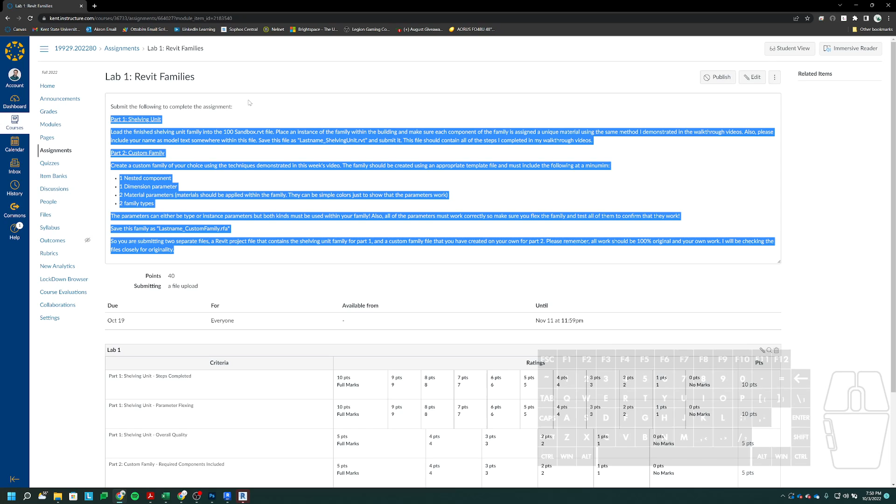So when you get to an assignment drop page, I usually have very specific instructions typed out to make it as clear as possible. You'll want to go here before completing the assignment so you know what all you need to build. This is just going to be all the required stuff, and it should be pretty easy to understand, hopefully.

Below that is your grading criteria, so this is the rubric. You'll know exactly what you're going to be graded on and what you need to focus on.

For example, for this first assignment, the total assignment is worth 40 points. A quarter of those points is just, did you complete all the steps? After that, did you put in all the correct parameters and did they flex properly?

Then we have overall quality. How nice does it look? Did you do a good job? Pretty straightforward. So I give you the rubric so you kind of understand what exactly I'm going to be assessing you on.

But as long as you do what I say in the videos and you read these instructions and do what they say, you should have no reason to worry about getting anything other than an A on all the assignments. And the way I approach my lectures and assignments is I usually like to walk you through them to help you understand.

So I really want to guide you and not just throw you to the wolves and have you try to figure everything out on your own, because I know how complicated these programs are and how overwhelming it can be. That's why I set it up like this.

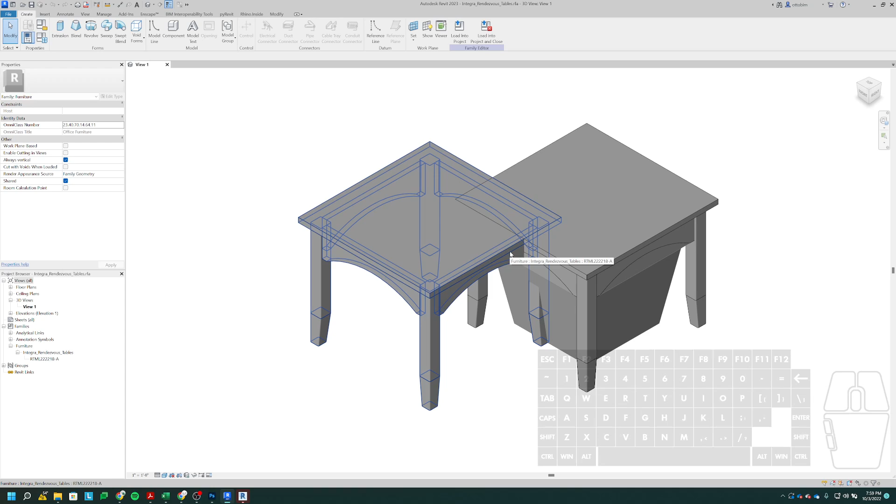So this family that I'm opening here is a family that a client gave me, and it's supposed to be a single table. This is something that's on their website, and a big part of what I do is have a...

...client ask me to audit or go through their current library of Revit models and assess them for quality, and tell them what's wrong with it, what needs to be done, what needs to be fixed. So this is one that I got that just kind of made me laugh because it's so weirdly bad.

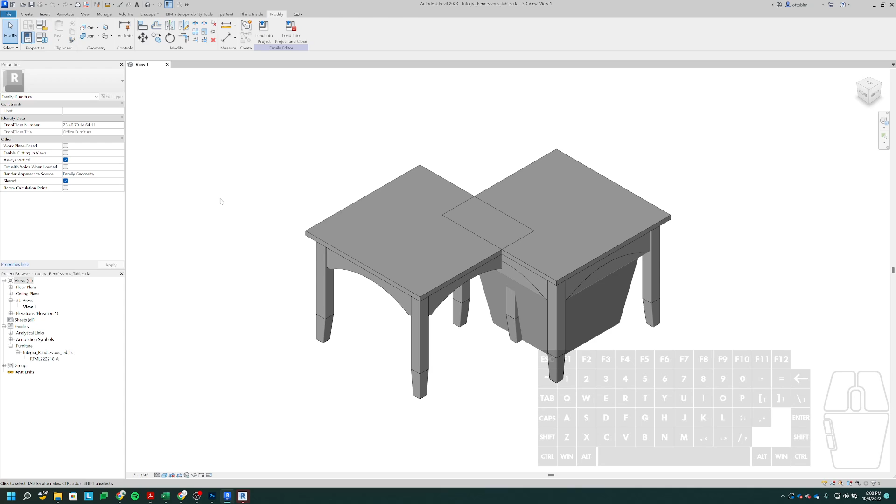So really it's supposed to just be this one family here, and by itself that family would be fine. For some reason, when you load the family and open it, this is what you get - you get 2 copies of that family on top of each other, plus this third base, I guess. It's just bad, the whole way they set this up. Obviously you don't want a table to look like this when you load it into your project. And if it does, and you want to be able to use this table, you need to know how to go into the family file to fix it to make it work for what you need. So we're going to get started just with the basics.

So first of all, over on the left side in Revit, we have two different sections: the Models section and the Family section. Models is for your Revit project files, whatever you're doing your studio project in—that's where you're going to create that. Families is going to be over here.

So the first thing we want to do if we're making a new family is click on the New button. Something to note here, and I bring this up in those Revit review videos—very important—I've heard from Jakisha that some of you have this problem and it needs to be fixed. If you click on that button and it opens this window, some of you probably do not have all these files.

Same goes for creating a new model. If I go up here to New Model and choose a template file for my Revit project, some of you may not have anything in this list, and that's a bad thing. If you don't have anything in this list or this folder, make sure you watch the video where I discuss that and show you how to fix it. And if you still have problems, tell me, because that has to be fixed—you're going to run into a lot of problems if you don't.

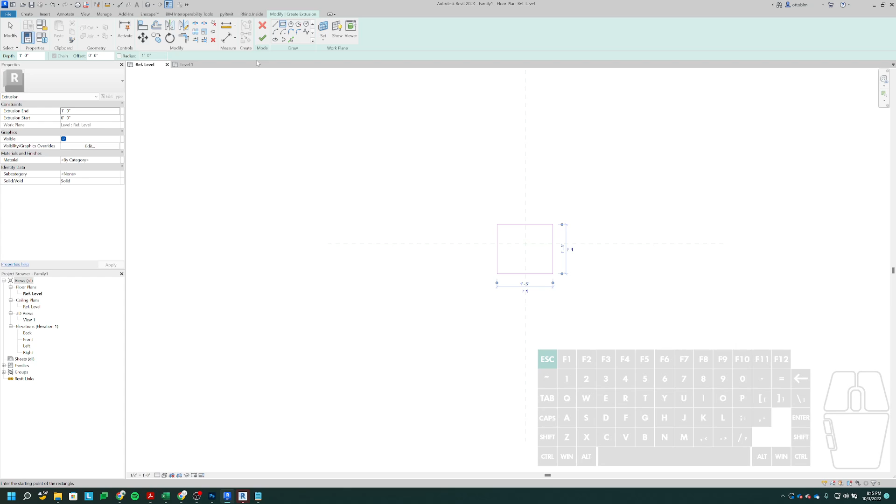All of these tools are what are known as solid tools. So let's just do an extrusion. If I were to make an extrusion here, that's going to appear just as a basic box, a solid box. Void is the absence of a solid, so a void will cut things away.

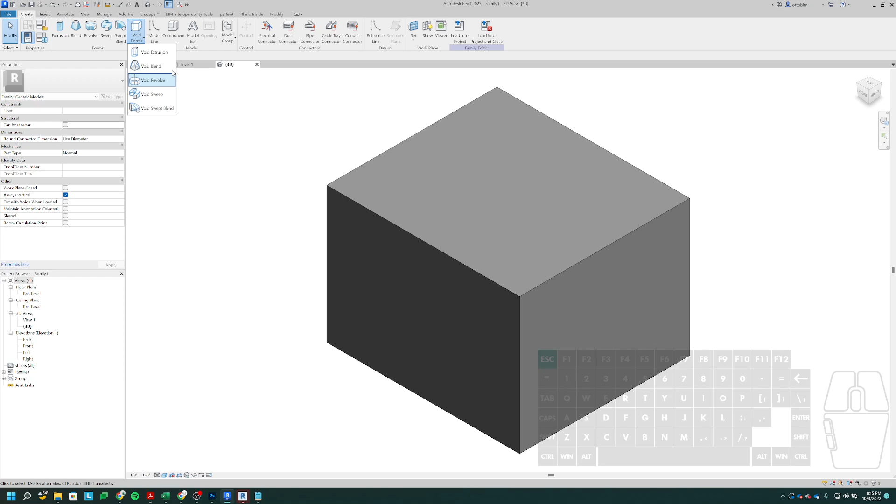So if I were to create a void extrusion, what I could do is click on void extrusion, and then again, I'm going to draw another shape over top of my old shape. At the point where those two intersect, it's going to cut a hole.

So you can make that anything you want and it'll update and cut away from the solid. So that's the first basic concept: void versus solid.

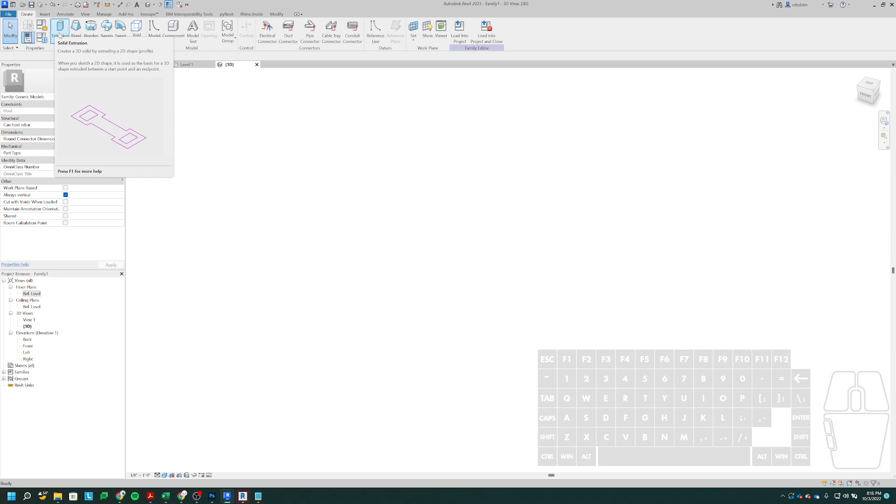Now that we understand that, let's get into what these actual tools do. If you're familiar with Rhino, you'll see a lot of overlap in the concepts between the two in terms of how you build geometry, like extrusion, what I just did. A really cool thing about Revit too, if you don't understand something, just hover your mouse over the tool and let it sit there, and you'll get a little video that pops up explaining what that tool does and how it's used. So if you get confused, just hover your mouse over it and it'll give you an idea.

As this says, all we're doing is drawing a profile. If I click on that, we're in sketch mode. Hopefully you're familiar with sketch mode—that's when the ribbon turns green and you get your drawing tools. We want to be working in a 2D view, like our floor plan here. Reference level, that's going to be our top-down floor plan view. So when you're in sketch mode, you get your tools here.

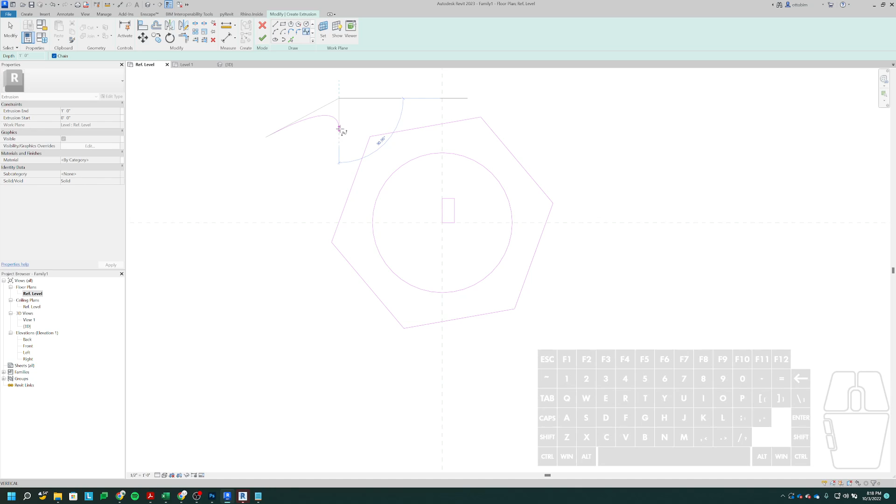For instance, we have circle, rectangle, polygon—we can choose how many sides we want. You'll get options here where you can do different things with the specific tool you're on, so when I change this, it changes the options available to me. Okay, arcs, splines, all kinds of drawing tools. Basically though, all we're doing is drawing a custom shape that we want.

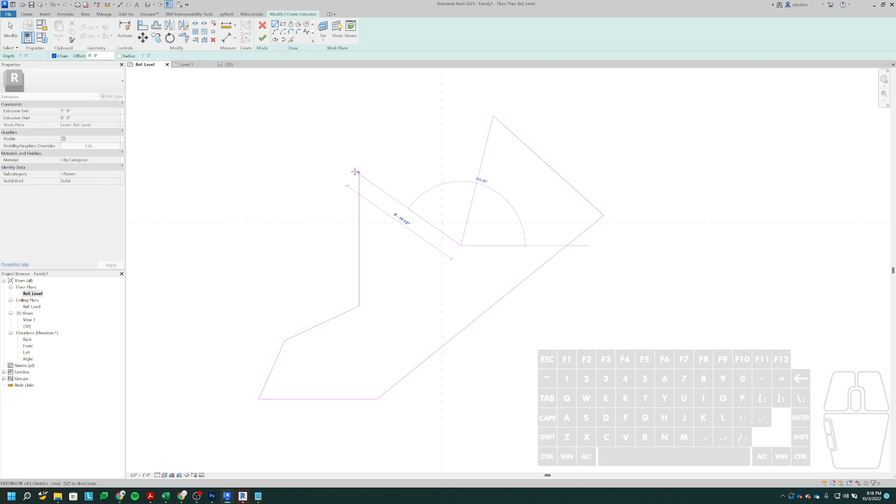Let me just make something a little abstract. I'll just use lines and draw some random shape. That's my profile, just that shape I drew in pink lines. Now that I'm done with that, I hit the green check mark, which takes me out of the drawing mode or edit mode.

If I go to a 3D view, default 3D view, it's going to show me what that looks like. An extrusion is really good for basic shapes that are only 3-dimensional in one direction—we're just taking that profile and pulling it straight upward, kind of lofting in between the two. If you're familiar with Rhino, you'll understand the loft command: you have two profiles and you bridge the two of them to fill the space in between. That's all an extrusion is.

The next one is a blend. A blend is a slightly more complicated extrusion—this is where you take two different profiles and make the in-between. Revit tries its best to make what's in between the two. Going back to the loft command in Rhino, you could draw two totally different weird shapes and use the loft tool, and it creates a weird morph between the two profiles. Same thing here—so if I were to, let's say, draw a hexagon.

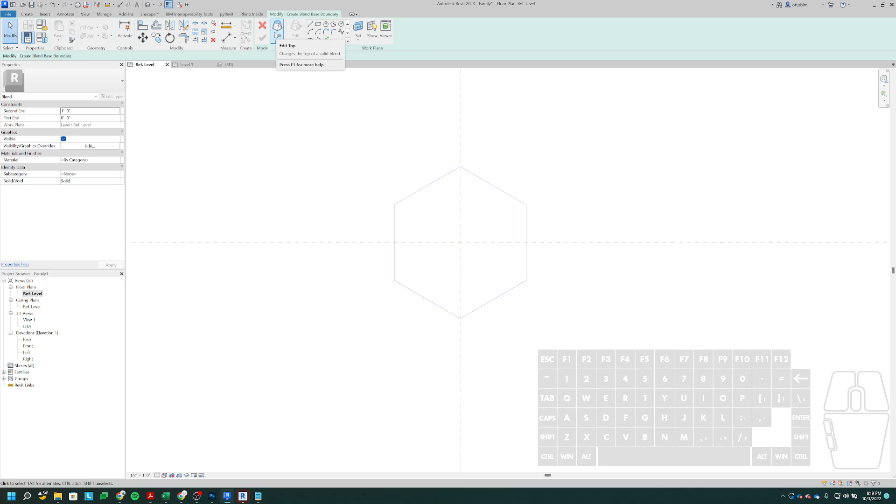Now let's just draw a hexagon there. Once I do that, I have to go to where it says edit top—so I just drew the bottom profile, which you can see here. The bottom profile is the bottom part of that plus sign, okay? So now the top profile is going to be the top part of it. I hit edit top, and then I can draw another hexagon, but maybe this time I'll rotate it—let's go 30 degrees—and now we click Finish Edit Mode.

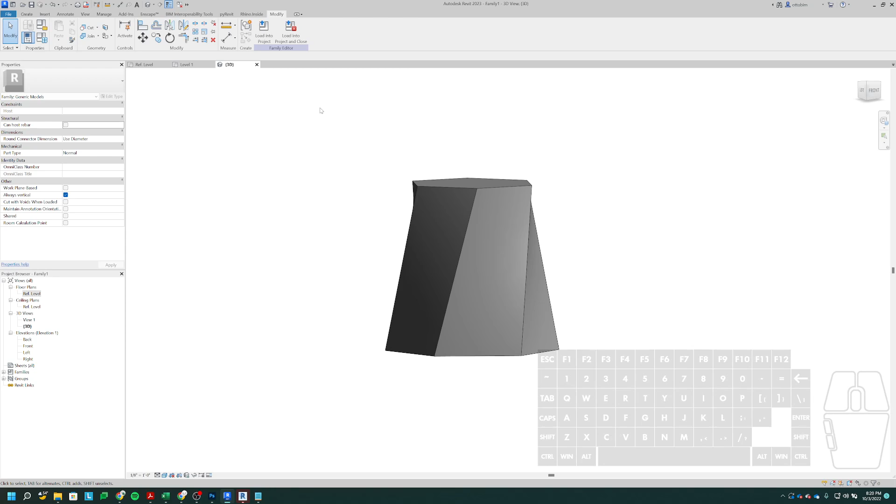Now you get a little preview here in the top view of what's happening—it's twisting. If I go back to my 3D view, you can see I have a smaller hexagon on top, and it's blending between the two, making a twisting shape. That's what blends are really good for—anything smaller on one side than the other but with 3D depth, or any weird shape where you want a cool morph between. So that's a blend.

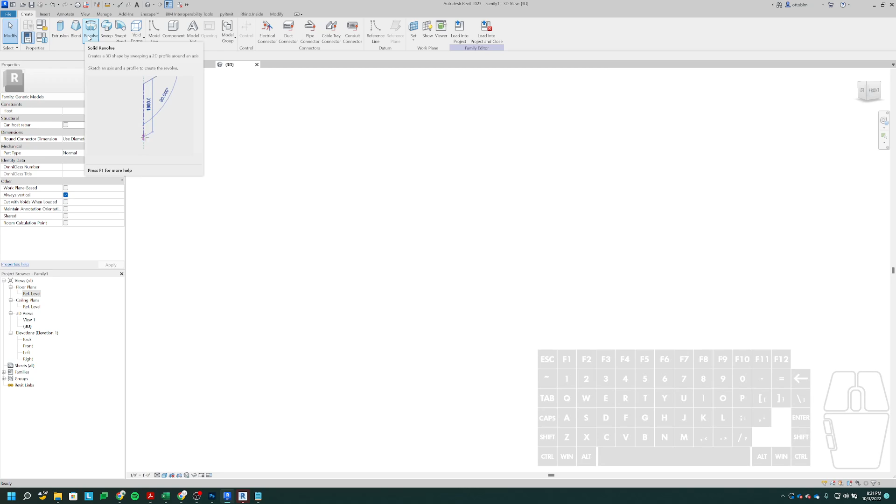Next one is a revolve. What a revolve does is you get a central axis, and you draw basically a cross section of a 3D shape. A really good demonstration for this is, let's just say I want to make a wine glass.

So if I want to make a wine glass, I'd want to make sure I'm in an elevation view. So I'm going to go to my front elevation, and I want to make sure that I start my wine glass here at the origin. The origin is going to be right here where it says reference level. Basically your reference level is your ground plane. So if I were to put this into my Revit file and I drew this at the ground plane, it's going to sit it flat on the ground.

This vertical line is this line, this one running top to bottom. It's the same line, but it's in 3D. So if I'm back in my front elevation, that's just that line vertically, basically. So I want to be right at the middle of those.

Now the first thing I need to do is establish my axis line. The axis line is going to be the central pivot that your shape or profile is going to spin around. Okay, so I'm going to draw an axis line.

I'm going to set my work plane. I'll get into that in a minute on what I'm doing here, don't want to skip over that. Set my work plane. So now I'm drawing in my front view.

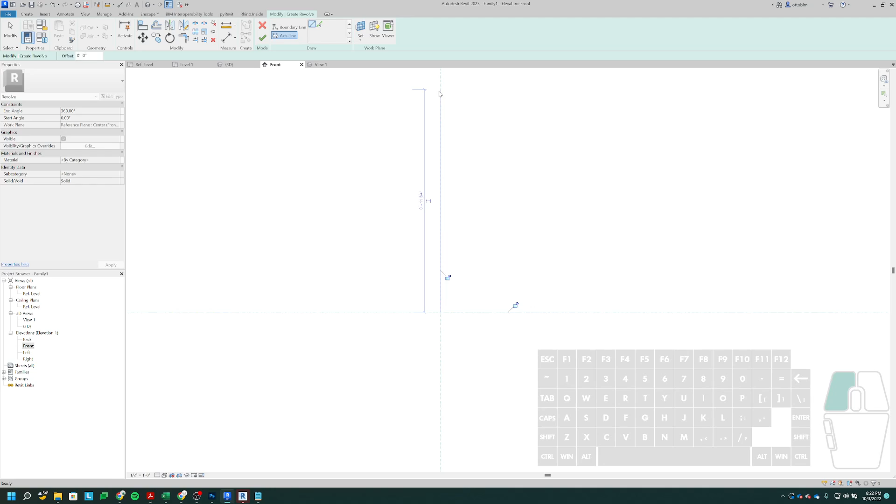So click on axis, and my axis line is just going to be here on my middle plane going vertical. And this line doesn't matter, it can be any length. It truly doesn't matter, but you have to make sure it's going in the direction that you want the shape to spin around. That's all it's there for.

If I were to put it like this, that's going to spin it at an angle, which I don't want. I want to make sure it's going perfectly vertical.

So then the next thing is drawing your profile. This is where you use boundary lines. So if you look at that little example there, the pink is my profile, so that's why I'm going to be using this tool to draw. The blue is my axis line. And you can kind of see the 3D shape there, what's happening.

So we're going to be drawing the pink cross section, and we're going to be spinning it 360 degrees around that blue dashed line, and it's going to make that thimble shape, or spool shape, that you're seeing there.

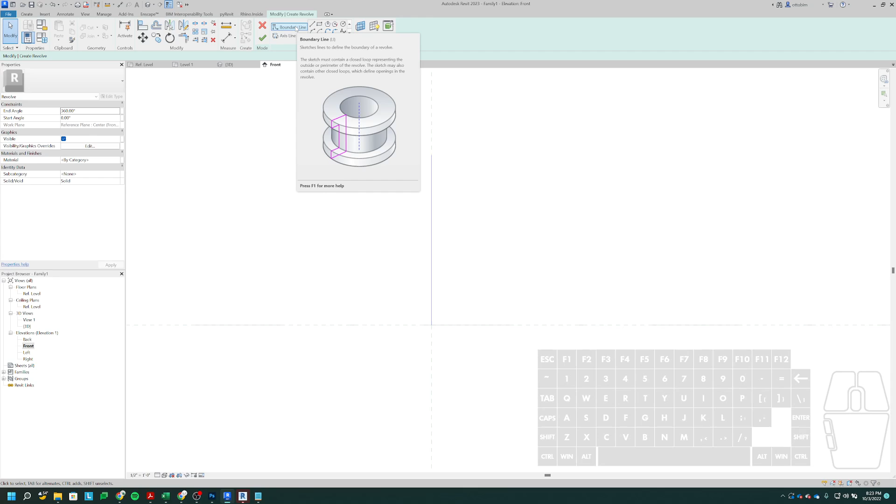So if I were to do this as a wine glass, first I'm going to start at the bottom, and I'm drawing half of the wine glass. So I'm going to draw the flat base there. And then I'm going to go here and establish kind of where the stem is. So I'm just going to draw a little vertical piece right there. Okay, so let's say that's my stem.

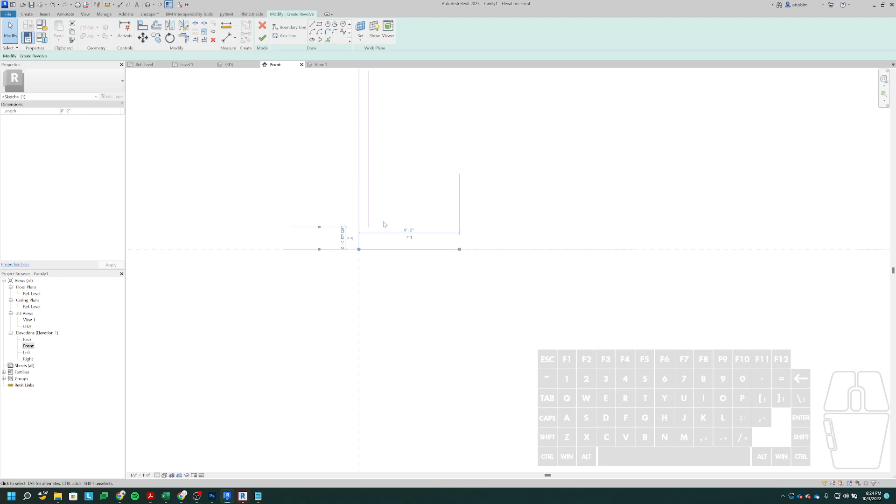Now I need to connect my stem to my base. And if you think about a wine glass, it's got a bit of curvature and kind of a taper to where it meets up with the base. So for that, I could use a spline.

Using my spline tool, I'm just going to draw a little shape here. And I want to make sure that the end of it—you click a few times to get these points—I want to make sure that my end point here ends right there at my base, at the end of it. After I draw my spline, I can then go and grab these points and edit them.

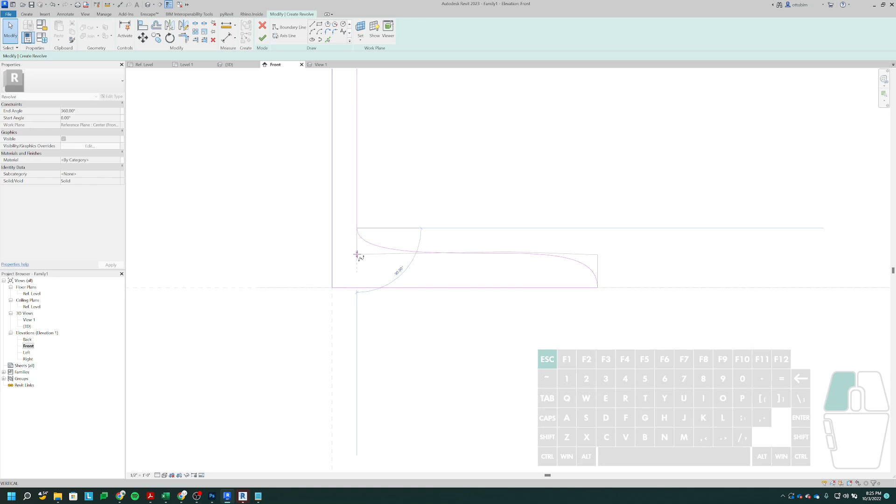So maybe I want this to be vertical here at the end. And then where it meets up with this side, you want this to line up straight with the vertical part. So you see how that gray line is perfectly straight with the pink line? That's what you want for it to look correct.

And then the middle point, you can kind of do whatever you want with it. Okay, so there's my base. Then for the top part, you could do that in a few different ways. So maybe the best way to do that is establish how tall this is. So proportionally, maybe somewhere like here at 3.5 inches. And I'm not using realistic dimensions at all, just don't worry about that.

But now I could use something like an ellipse. What an ellipse does, it's basically like an oval.

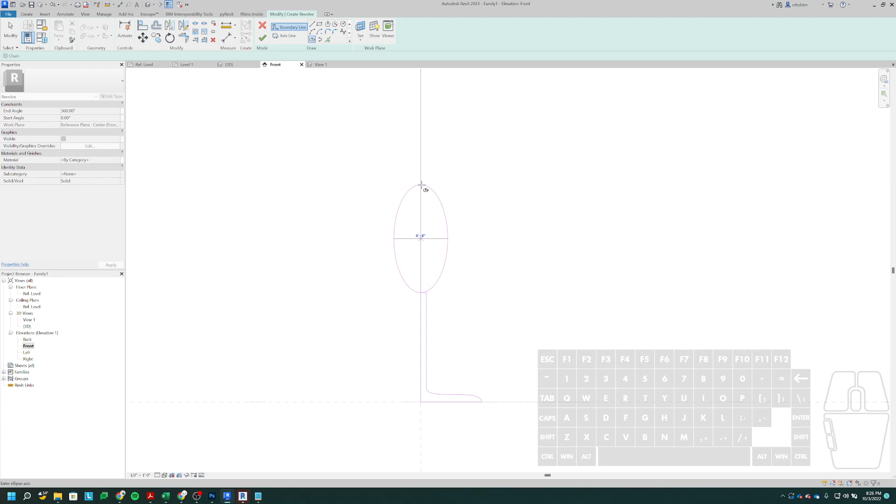With this, I can start at the midpoint of this line, then go to this endpoint that I established, and drag out to the right to get how wide this is. Maybe I want it to go somewhere even with my base here, that would be fine.

Now that I have that in there, I want to chop this off and have a flat top here where I would actually drink out of the wine glass. So I'm just going to draw a line cutting through this, and you can move it up and down with the nudge tools after the fact to fine tune it. Maybe something in there is good.

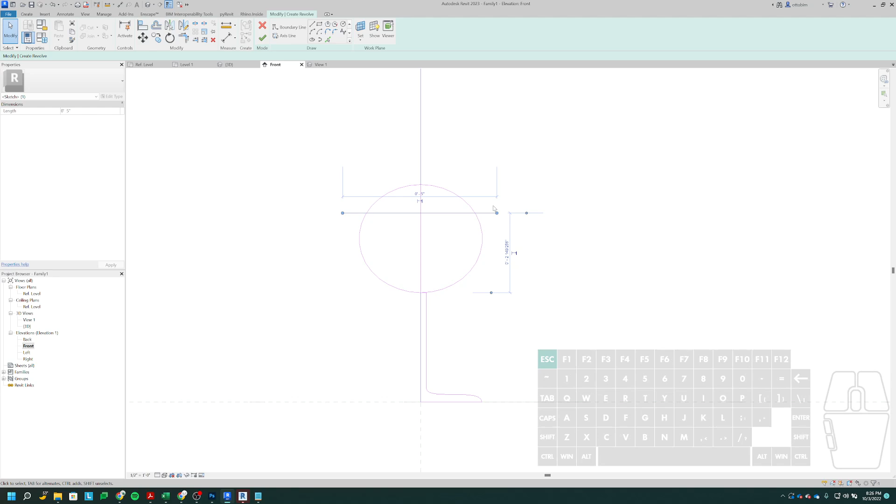Now we have to clean all of this line work up so it actually is a correct profile, because right now if I hit OK, it's going to give me an error. I can't have any overlapping lines. This has to be a nice, cleanly drawn profile in order for it to work correctly. So to do that, you have to get familiar with these modify tools.

The modify tools are the exact same in a Revit project environment as they are in the Revit family, so it's going to look very consistent going from the Revit project file over here to the family editor.

What I want to do is use the split tool. The split tool lets you hover over an element and kind of chop it in half with an X-Acto knife so you can edit it. If I click on split element, I'm going to cut my ellipse in a couple different spots, here and somewhere down here. Now that I've done that, hit escape a couple times, I have two separate pieces, and I can delete this one away.

Next thing I need to do is zoom in here where I made this little line going back to the center, and I need to get rid of it. So I'm going to delete that.

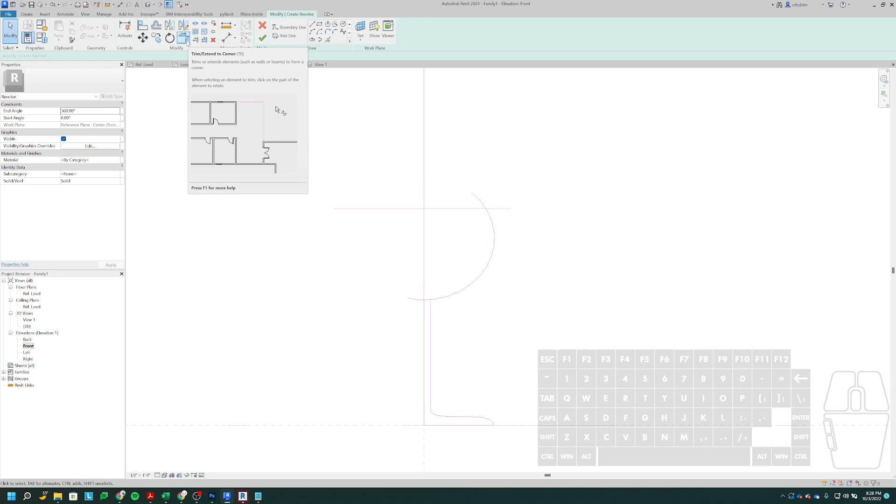Then we should have everything we need to finish this profile. To finish it, you can clean it up with this tool, and I use this tool all the time, so make sure you know how to use it. This is the Trim Extend to Corner tool. If we click it, it lets you click on two lines and automatically trim this up and make it a nice joint.

When you use this tool, you basically want to click on the side of the line that you want to keep. In this case, I want to keep this part of the line, and I want to keep this part of the line, and then the other two extensions go away. To reiterate, if I were to click on this side of the line and this side of the line, it's going to get rid of the wrong thing. So you have to make sure you're clicking on the right part of the line to get it to do what you want.

Again, I'm just going to do this and this, and then we're going to do this to the vertical pink line here, and this line here to this vertical line. Sometimes you get these little errors, that's fine in this case. That just means it's taking this line and disconnecting it from this pink line, which is fine, so you just hit unjoin elements.

Then we have to finish this off by connecting this line down to our base. Okay, so there's the finished profile.

If I were to hover over one of these lines and hit my tab key, if everything turns blue, you know that it's good, you're pretty much good to go. If it doesn't, you probably have a little mistake somewhere that you need to correct, and then you can go in and fix it. But hovering over it and hitting tab, that's a really good test to see if something is wrong.

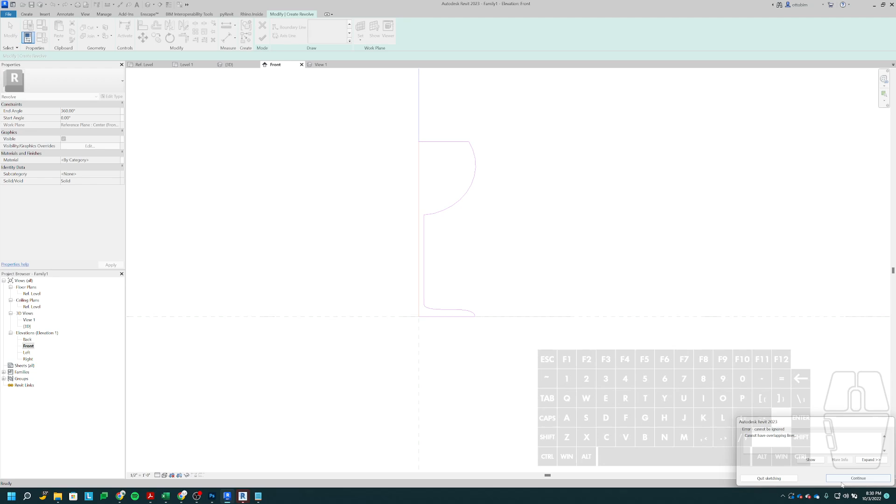So what I like to do is do the test where I tab and make sure everything is blue. Then I click on this and use this tool right here, which is cut to clipboard. You can click on this button, or use Control C, or hit Control X, and that will cut the profile onto your clipboard and get rid of it here.

Now I can see that pink line that's overlapping, and I can highlight it and get rid of it. Then to bring back my profile, I go here to Paste, and choose Aligned to Same Place, and that's going to put it right back where it was, and I should have no errors.

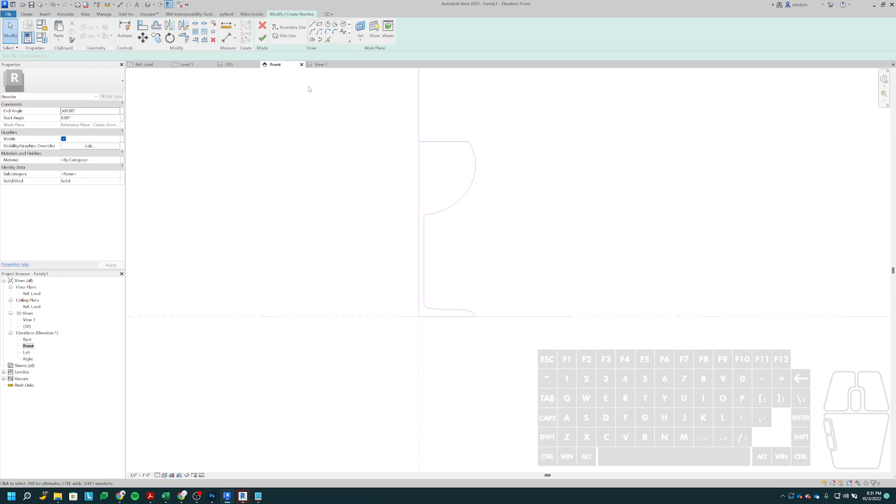Then when I hit the check mark, it's going to finish my revolve. And if I go to 3D view, you're going to see I have a little wine glass that has a filled top to it. So that's one more thing I forgot to show you. Let me fix that.

If you want to modify an element after it's created, go ahead and click on it and then hit the edit button right here. So edit revolve. Now we have to draw in that void part where the wine glass is actually hollow on the inside, because right now it has a flat top, which we don't want.

So to do that, there are a few different ways we could do it, but I'm going to do it this way to show you the offset tool. What the offset tool does, if you've never used it before in Rhino, is it lets you take a line and either move it inward and make a copy of it inward or outward based on a set dimension that you specify.

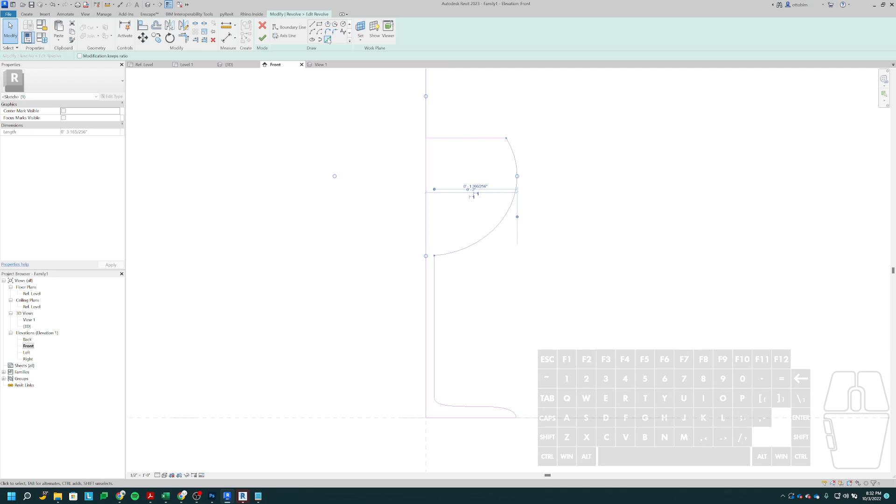In this case, you click on the line you want to offset, and basically what I want to do is copy this line here inward to make sort of like an inner wall to the wine glass. I'm going to use this tool here, the Pick Lines tool. What the Pick Lines tool does is it lets you hover over a line and redraw it. Oh wait, no, actually I don't want to use Pick Lines. What am I thinking? I want to use the offset tool here.

So what the offset tool does, like I said, lets you make a copy. My distance that I want to offset this, I want it to be the same thickness here as it is here on my stem, so like half of my stem width.

So to get that dimension, I'm going to measure between these points, and you can see it's really weird, it says 47 over 256. So it's also showing it up here. You can actually go up here, which is kind of cool, highlight that and right click and copy it, so you don't have to remember that.

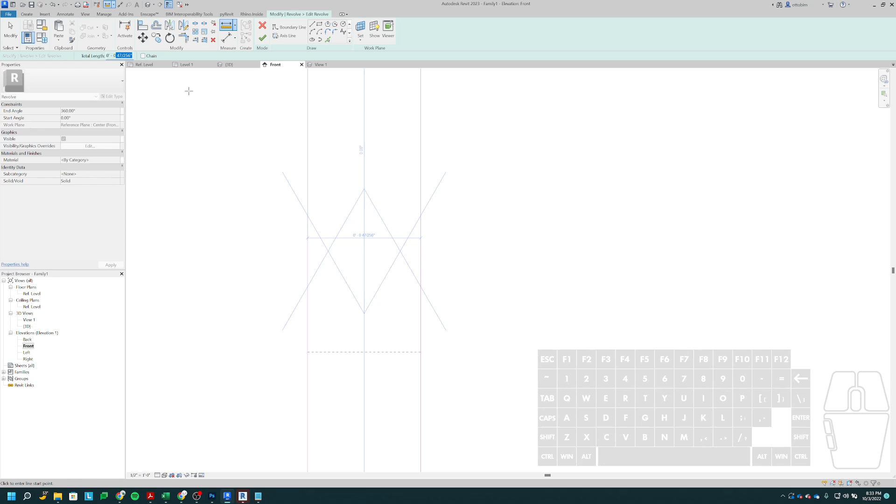Okay, so now that I have that, go back here and use my offset tool. We're going to type, or we're going to hit Control V to paste that in. So now that's set. And then I want to hover over my edge line here.

If you hover over it, this is kind of a sensitive tool to where if you hover over it a certain way, it's going to give you a preview of it offsetting outward. If you hover over it the other way, it's going to offset it inward. Notice we also get this option here to copy it, and we want to keep that checked on because I want to make a duplicate of this line and not delete the original one. So I'm going to keep that on and click once, and it's going to make that copy for me inward.

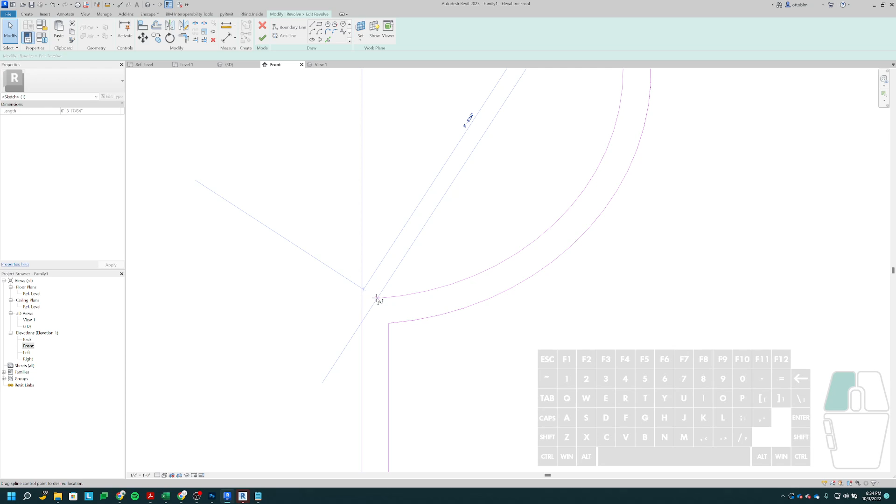All right. Then what I'm going to do is use my trim connect to corner, and I'm going to do this line to, of course it's not going to let me. I'm just going to click on this and use my grip.

Sometimes with offsetting arcs it gets a little weird, so I'm just going to move my grip inward to finish that off. Then up here I'll drag it up so we get some thickness. Usually you won't have to do that, it'll just work, but in this case I'll manually connect the two together.

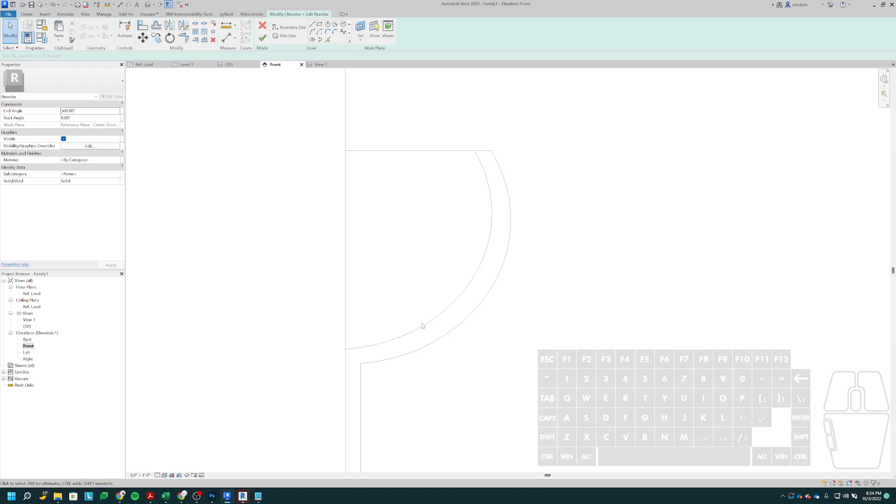So there we have an inner wall. To finish these off at the top, we could just make it a flat edge, but what I like to do is actually round this off a little bit.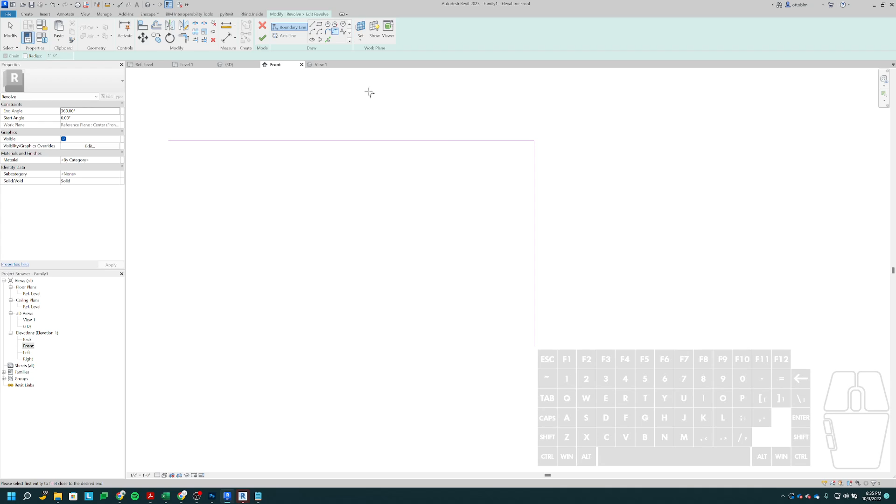There's a tool called the fillet arc tool, which is cool. What it does is let you click on two points to create a rounded joint instead of a hard edge. A good example would be a corner like this - click fillet arc, click the two points, and make a nice rounded joint between them. But in this case it's not going to let me, so we'll just leave it like that.

So then we'll click OK, go back here, and you can see now I have a nice open area inside my wine glass, and it looks more real. Okay, so that's the revolve tool - drawing a profile and spinning it around a central axis.

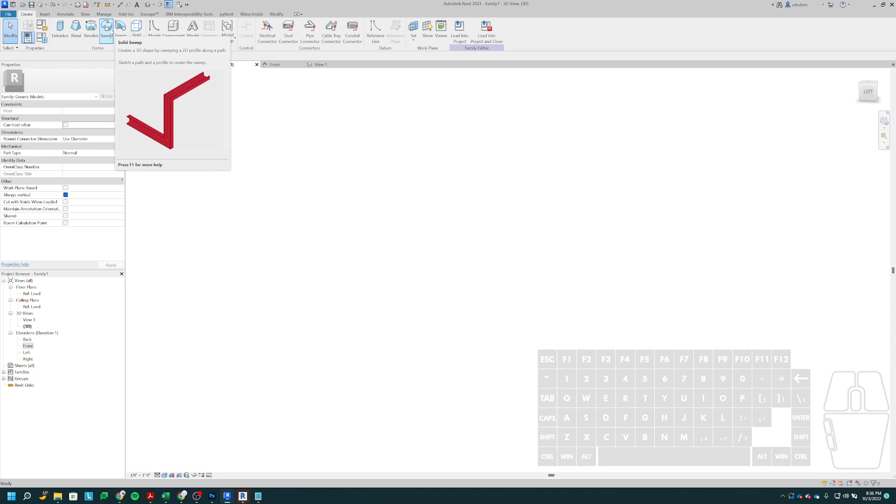Third tool is going to be sweep. What a sweep does is it basically takes a profile - let me go back to the tooltip to show you the animation - it takes a profile and extrudes it along a path. In this video you can see they're drawing the path, then they draw the profile, and when it extrudes, it's like a snake that makes the profile follow that path.

Good use cases for this in a project environment or real life: if you think of crown molding or a baseboard, how it wraps around the edge of a room, you would use the sweep tool to replicate things like that in Revit. I use it a lot for furniture, like legs of furniture - a lot of the furniture I build is industrial stuff with metal pipe legs, and I often have to use sweeps to build that geometry.

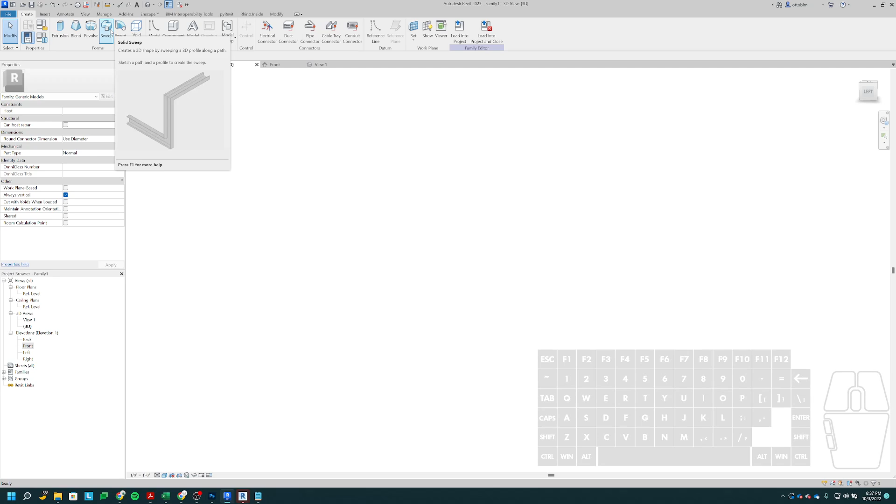So let's click on that really quick. Basically, if I'm in a front view - no, I'm in the 3D view. If I'm in a front view, set my plane. I'll show you what I do on a daily basis when making those metal tube legs. So let's say I have one leg here.

I want to first click on sketch path to define the path. So I want to start by drawing that, and then draw it over here, and then over here.

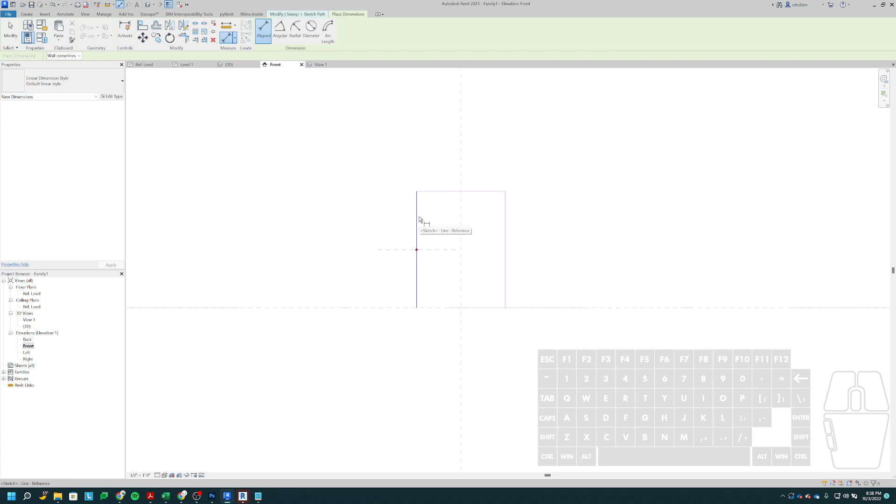Now I want these legs to be equally spaced from the center point of my origin. To do that quickly, I'll use my dimensions. If I dimension from the left to the middle to the right, I can see those are matching, but to keep them matching I want to hit this button called equality. I'll get more into equality and constraints in a minute, but constraints let you create relationships between geometry.

For example, if I click on this line and move it in or out, you can see how the left one moves in or out with it, relative to the center point of the model. That's kind of cool, so I'm going to link those together like that.

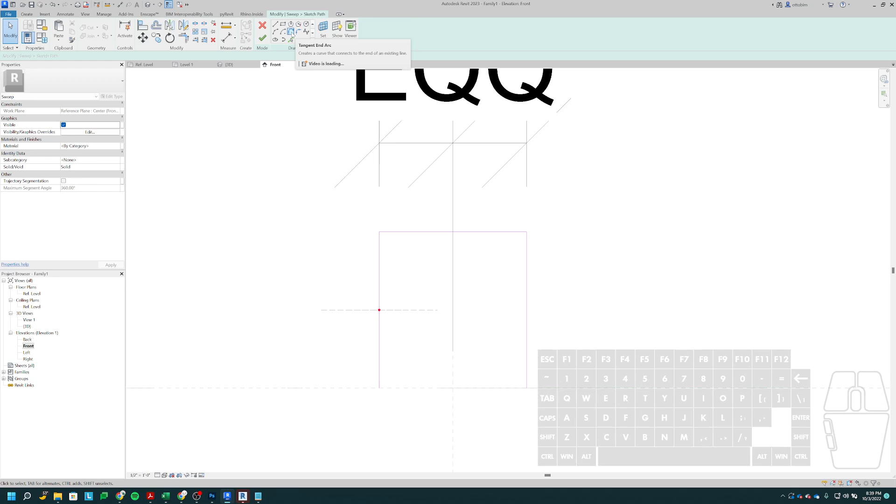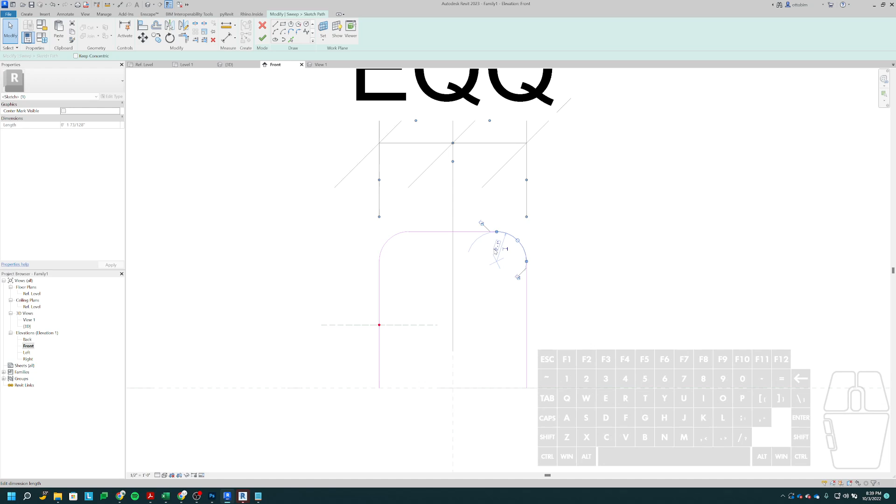Then I'm going to use the fillet arc tool like I showed you before, and draw a little arc between these on both sides. I want to make these the same arc radius, so I'll click on one side and edit this. Right now it's set to 3/4 of an inch, so let's do 1 inch. I'll click on the other one's dimension and type in 1 inch. Enter. Now they're the same.

So there's my path that I want my legs to go along. Now I'll hit the green check and say okay, path is good, done with that. Next part of this is the actual profile that gets swept along the path.

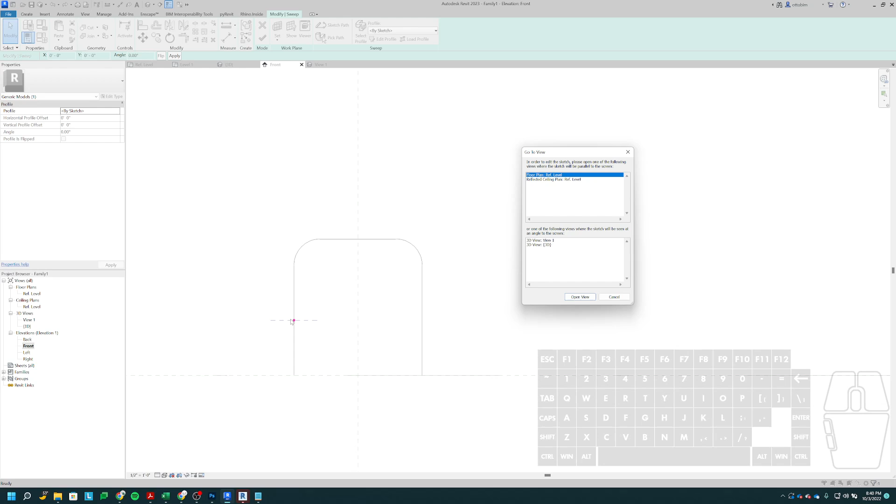To do the profile, you click on Edit Profile right here. When you click on that, it takes you to another view to draw it, because this is the point where you're drawing the profile, this little plane here. If you think about this in 3D space, the profile is basically perpendicular to your current view. I'll show you that in 3D, because that's hard to wrap your mind around if you're not familiar with working in 3D.

So I'm in a 3D view right now, which hopefully illustrates the point better. I have my path here, and if you look at the actual point where I'm going to be drawing my profile, it's perpendicular to that path. If I were in a front view and tried to draw it, it's not going to work. I need to be in a top-down view or a 3D view with an angle where I can see what I'm doing.

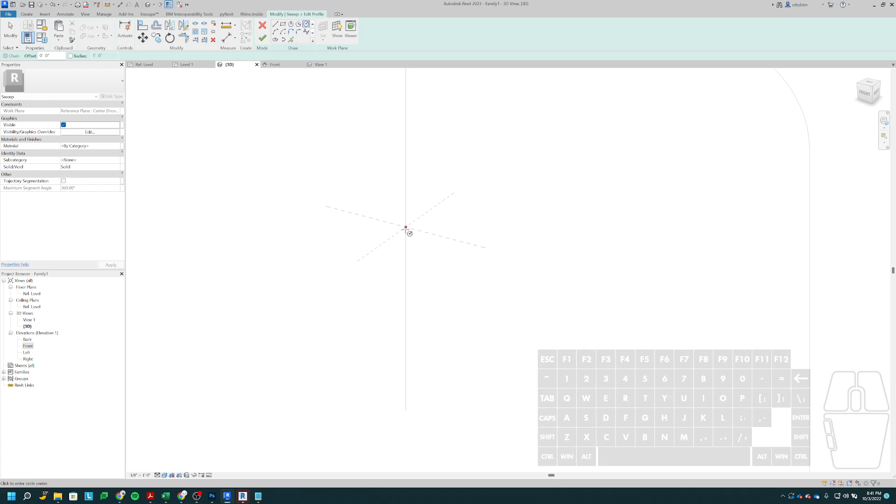Now I want to draw my profile, so I'll hit Select Profile, Edit Profile, and get into the Edit Profile settings, you can see that right here. I want to make this like a tube, so I'll use a circle as my profile. I'll click on the circle, click on the center point of my plane, and click on Show Plane so you can see it. This is the 3D plane that I'm drawing on, this blue square. As I draw, you can see it's stuck to that 3D plane. I'll draw that circle and exit out, hitting escape a few times.

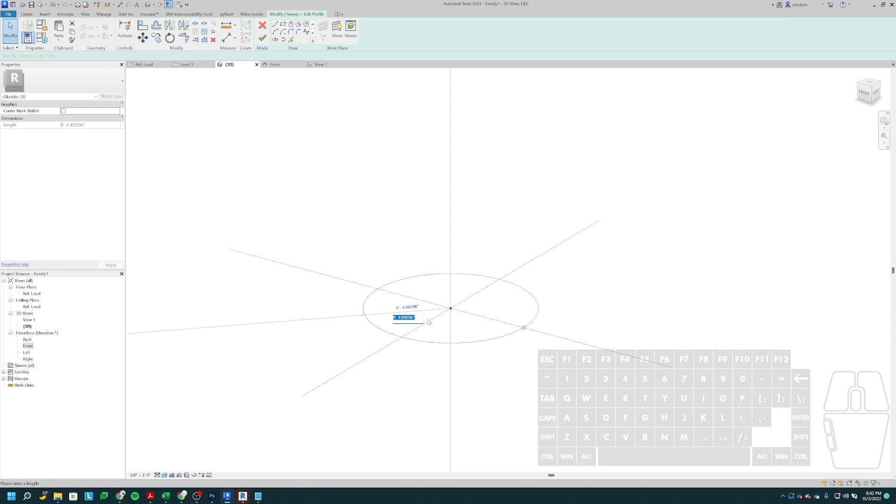Then I'll click on the circle and edit this to be a radius of, let's say, 1/2 inch. These are going to be some chunky legs, I guess. We'll click OK, and then click OK again, and you can see what that does. So these are some really short, stocky, chunky legs, but you get the idea.

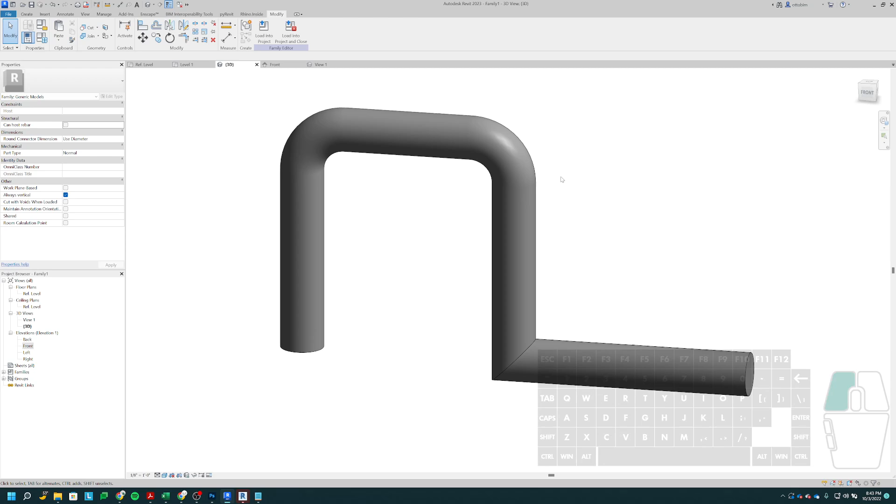It's taking that circle and extruding it along that path. Anytime I make an adjustment to that path, it's going to change the way the shape is swept along it. So if I were to add to that path, for example, and make a hard 90-degree corner here, when I finish that, it's going to add that hard 90-degree transition as opposed to the smooth radius transition I built in previously. So that's what the sweep tool does.

The last one is swept blend. Honestly, you're barely going to use this, so I'll demo it really quick, but don't worry too much about this one. It's really use-case specific; I almost never use this tool. Swept blend is pretty much the same as a sweep—it's exactly what its name implies, a sweep but also a blend. So you're taking two different profiles and blending them across a path that you draw.

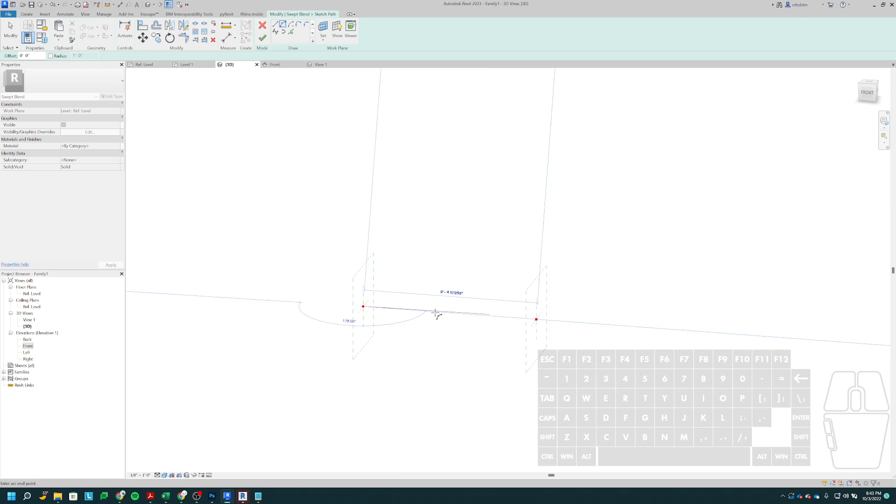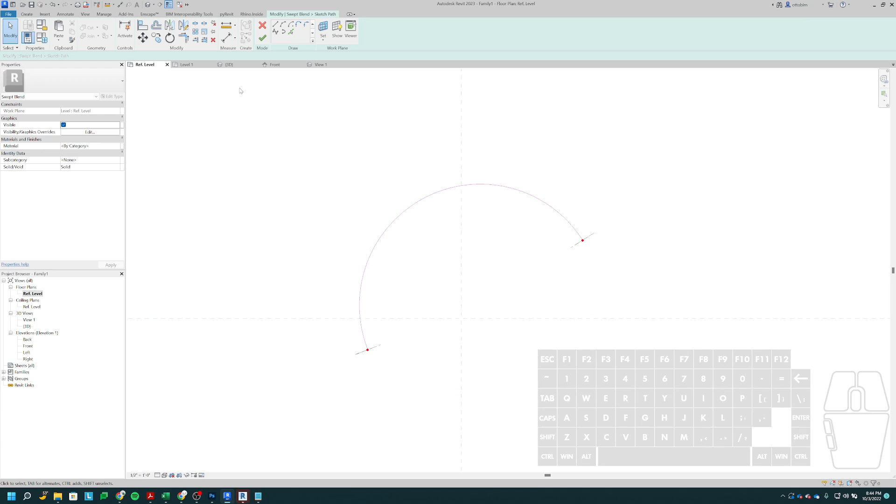So if I draw a path, the only catch to this tool is you can only draw one line segment for the path. Let me do this in a floor plan view, it'll be easier to demonstrate. If I were to draw an arc as my path and then try to add to this path, it's going to yell at me—it won't let me do two segments when I click OK. See that? More than one segment not allowed. So you can only do one. This is why it's kind of a dumb tool, because it's super limited. So let's say that's my path.

Click OK, then you get the option to draw the two profiles. So we have one profile on this end, one profile on this end. I'm going to select profile 1 and edit profile.

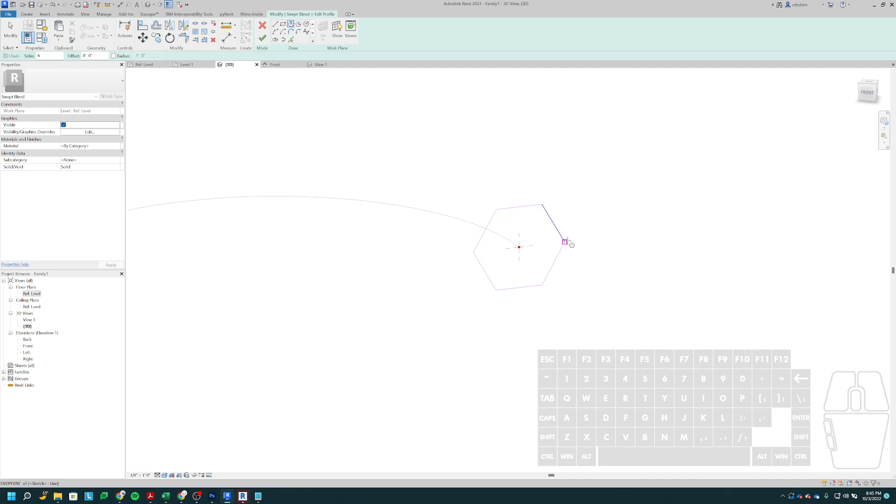Now it's going to prompt me to go to a view where I can edit that profile like I did before. So I'm going to go to my 3D view, and draw my first profile, let's make that a circle. Then we're going to draw the second profile, let's just do a hexagon again. Then we'll click OK.

Now you'll see what that did. It took a circle and tried to make the in-between of whatever exists between a circle and a hexagon. So it's a very weird tool, and you're pretty much never going to use it unless you're doing something really crazy abstract. But for the most part, you can kind of forget that thing exists.

The other tools, like I said, these are voids. They are the exact same thing as what we just did, except they are the subtraction version of it. You can actually make something that's been created as a solid into a void by clicking on it, going to identity data, switching it from solid to void, and clicking apply, and that's going to make it a void.

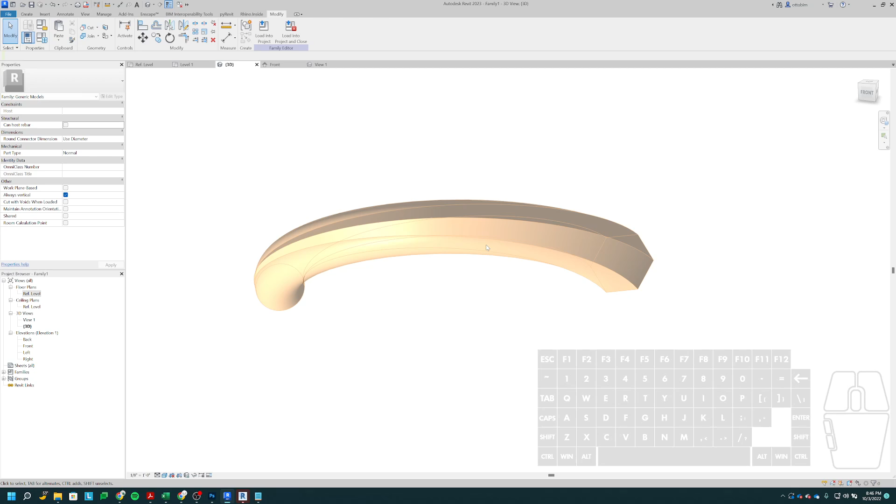We'll get more into voids here in a little bit, especially in the first assignment. We'll use voids a little bit, but sometimes you just have to use them. Most of the time, you're going to stick with these four tools. Actually, don't worry about blend too much either. Really, it's just extrusions, revolves, and sweeps, and then the void versions of those: void extrusion, void revolve, void sweep.

Coming from Rhino, that probably sounds super limited. And it's like that for a reason. The reason is Revit is built as a parametric modeler. So you might have heard of that word before. Revit is a parametric modeler.

So what a parametric modeler is, is a 3D application that lets you make geometry intelligent. Going back to what I was saying before, Revit, as dumb as it may seem sometimes with how annoying it is, and I get it, it sucks for a lot of things, it is really intelligent in some ways. Being a parametric modeler, what we can do is some pretty cool stuff. I could sit here and try to explain it, but I'm just going to show you instead because that's way easier for me to illustrate and for you guys to get, I think.

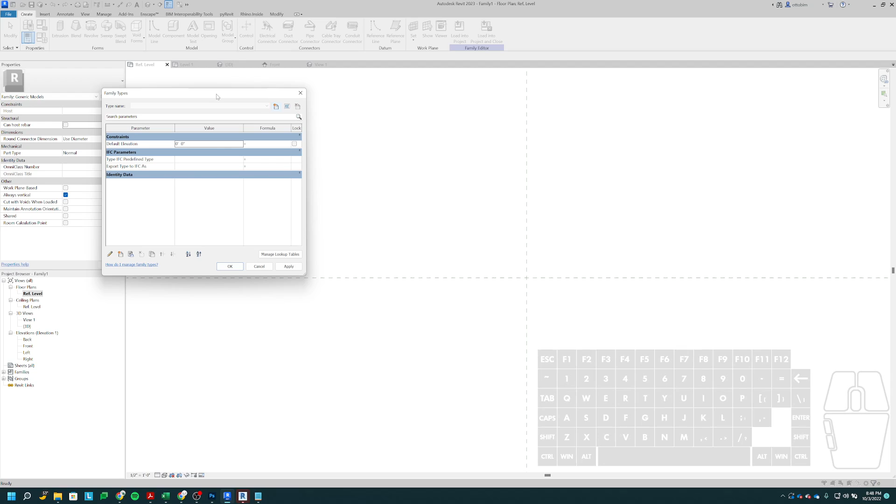So parameters, hopefully you've heard that word before. A parameter is basically any setting in Revit that you can change that's associated with an object. If I go up here to this window, this is called the Family Types window. If I were to click on it, hopefully it looks familiar. This window is basically your settings window within a Revit project file. Let me hop over to the project again.

Let's say I want to place just a default piece of furniture. So if I go to Architecture, Component, there's always a desk in here by default, so we're going to place the desk. There's my desk in the plan view, and when I click on it, you can see on the left side I get some information about the desk: constraints, identity data, phasing, IFC parameters, whatever.

What I'm interested in right here is edit type. So when I click on edit type, this is the exact same window that we looked at in the family editor. So family desk, and then we have these types here. I click down the drop down menu and we have 3 different types of desks we can choose from: 60 inch by 30 inch, 60 inch by 30 inch student, 72 inch by 36 inch. All these types are doing, basically you can think of these as presets. These types are presets that change these parameters.

So we have dimension parameters for changing height, width, depth, leg height, whatever, changing the size of the 3D object. We have material and finish parameters. So if we wanted to change the finish on the top of the desk versus the finish on the actual sides, or like the base of the desk, we can change all those there. We get control over body material, handle/leg material, top material. Let me go to 3D view to show this a little bit better.

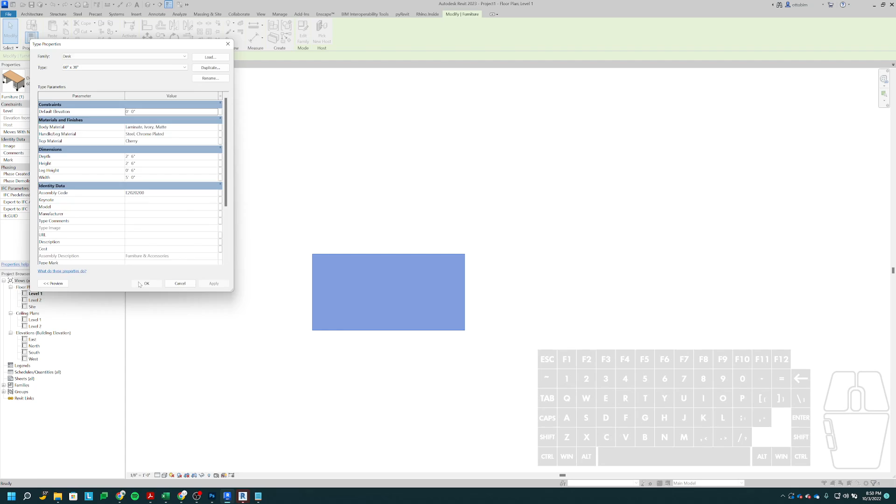That's also a cool little tool if you've never used it before. If you click on something in a 2D view and want to see that exact thing in 3D, this button right here is called Selection Box, and that will take you to a 3D view that is cropped to only that object. That's super helpful, because working in 3D is always better and easier to understand than working in 2D. So that's what I like to do.

Okay, let me hide that little box. There we go. So there's our desk, right? If I go to a realistic view so you can see the materials a little bit better, that's what the materials on this thing look like right now.

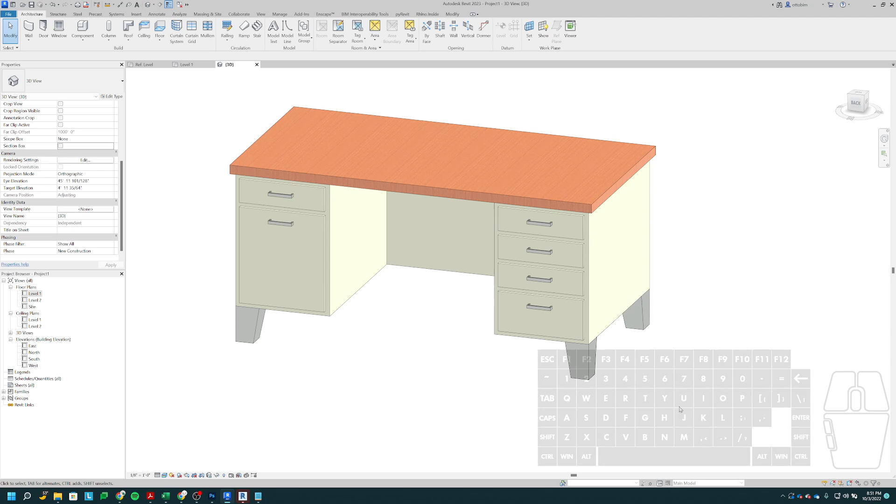If I click on it again and go back to my edit type settings, with my controls I can change materials. Hopefully you've changed materials on things before in other classes, and this is all review, that's great if so. But just to illustrate what a parameter is, make sure we're all clear: if I were to copy the name right here, laminate ivory matte, for this body material, and paste it over the top material, you're going to see that the top material is now the same as the body material. So we get control over the material that's applied to that geometry.

If I were to change the dimensions, let's say I want to make a new version of this desk, one that is 72 by 30. If I duplicate this, let's call this one 72 - actually, there might be a 72 by 30 already. No, there's not. Okay, 72 by 30. So if I make the width now 72 inches, you're going to see the desk become wider, because we're changing that dimension parameter. Now that's a 6 foot wide desk as opposed to a 5 foot wide desk. If I go back to the 60 inch... hang on... there we go. You can see it got bigger. It made it bigger, right? So that's a dimension parameter.

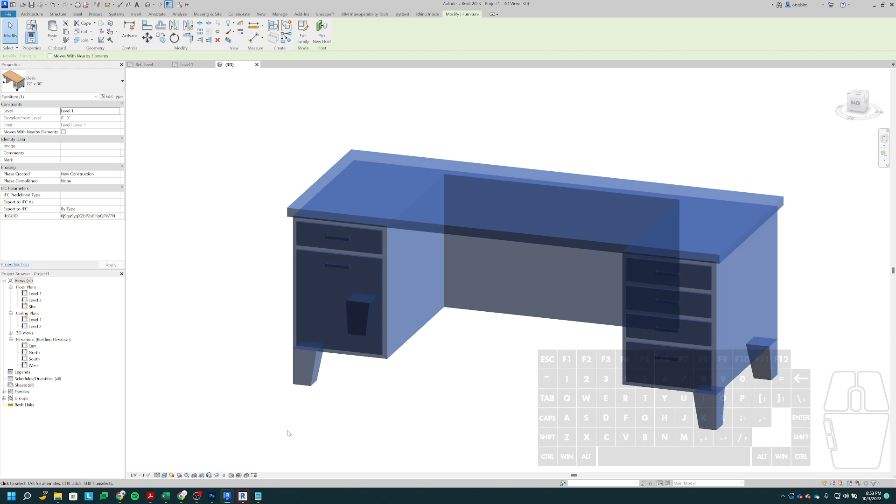A parameter is anything we can build to change things and get different sizes or materials of things, and that's why Revit is intelligent. You could build this desk without any parameters, but that would defeat the purpose of Revit and what it can do. Why would I want to build this desk and not be able to modify it in any way? It's just stupid. If you want to take advantage of Revit, you want to understand parameters and make the family as flexible as possible, so that in a project, if I need something narrower to fit a particular space, or wider, I can just click on it, change the dimension, and make it fit the space. That's the idea.

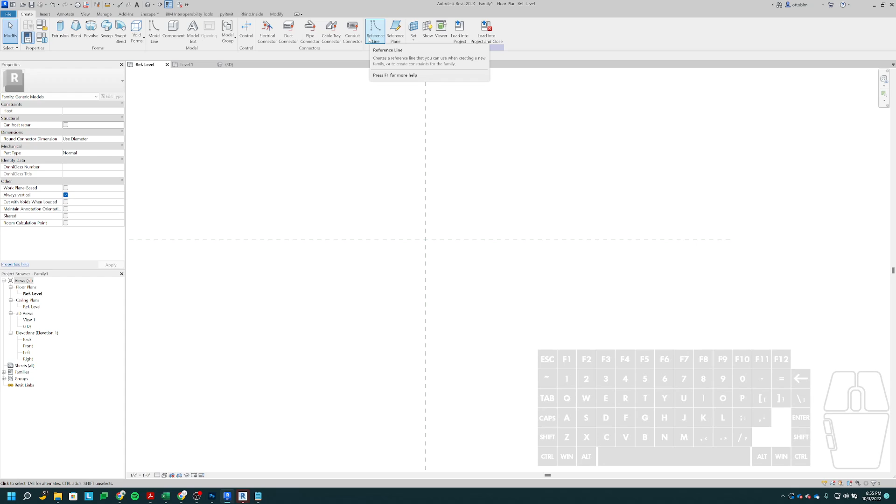So if I were to build just a simple parametric box, a simple shape where I can control the height, width, and depth, to start out what I want to do is go to Create, and go to Reference Plane. You also have this thing called reference line, but honestly I would not worry about that. I pretty much never use those. Reference planes are what you really want to focus on.

So we want to draw reference planes, and you can do this either by clicking on the button here, or if you look at the name where it says reference plane, it says parentheses RP next to it - that's basically the hotkey. So if I hit RP, it's going to create that for me instead of clicking the button. Now you can see it says modify reference plane.

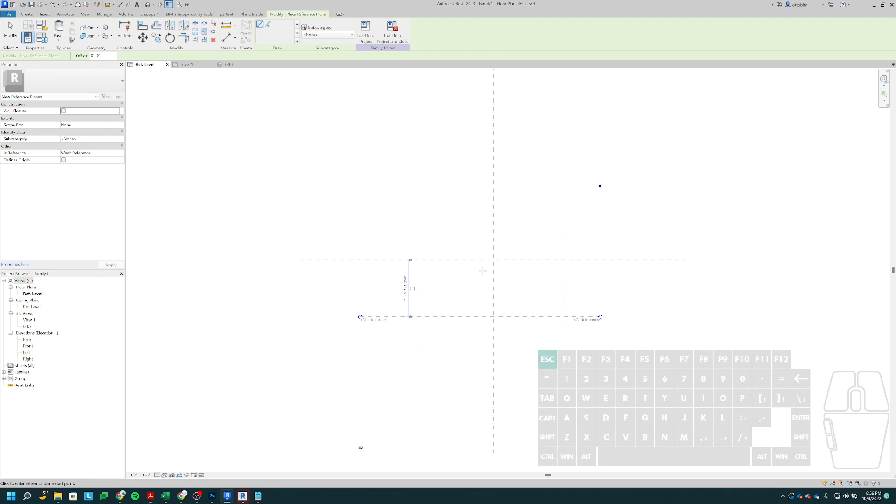So to start, I'm going to draw 4 of these, one on each side. You don't have to worry about placement or length when it comes to reference planes - it doesn't matter, they just have to be in there. So I'm just going to draw 4 of them wherever. But I want to make sure they're on either side of the vertical line in the center, and on either side of the horizontal line in the middle. So just like that - we want basically 4 quadrants, 1, 2, 3, 4.

After we do that, we're going to create some constraints. Constraints are basically the things that tell Revit how to make geometry move - that's how we create our parameters that we can edit in that parameter window. Right now there's no controls over dimensions in here, so we're going to create those now.

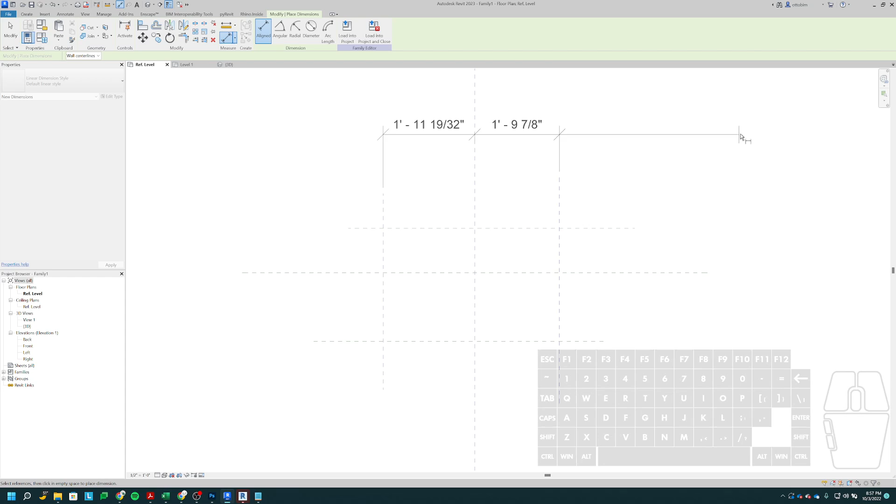First thing, we want to go to the Annotate tab and use the aligned dimension - the shortcut for that is DI. The first thing you want to do is make sure everything is equally spaced, so that's where those EQ dimensions come in that I showed you prior. I'm going to click on the first reference plane, click on the middle, click on the right, then drag off into space and click one more time. You can see the dimensions don't match, so we want to click EQ to tie those together and make them centered on this vertical line.

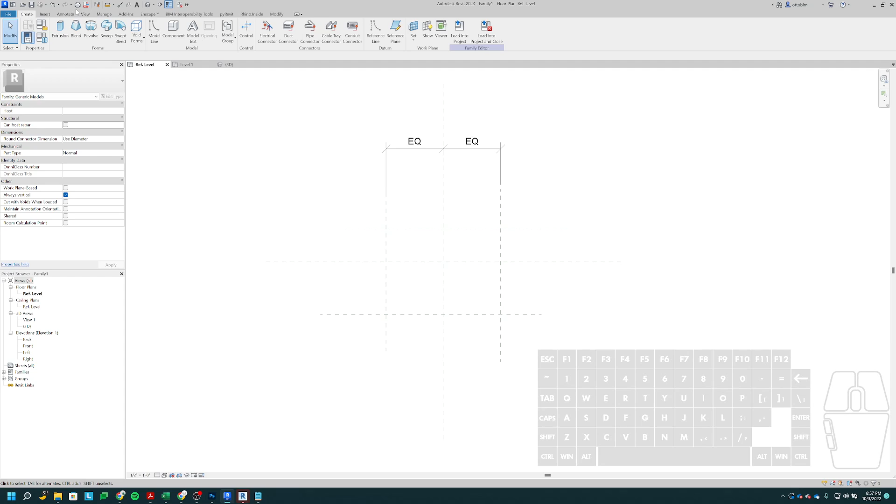We can test it - if I click on one of them and move it in or out, the other one should move equally with it. Then I'm just going to do the same for the other one, like this. Now if I move that one in or out, it moves up or down the same.

Okay, so after we have those established in our floor plan view - we're in a top-down view - we want to name these so we can understand what they are. This is optional; if you know what you're doing you don't always have to name them, but sometimes you do. To name these, you just click on them, then click on the little click to name, and give them a name. In this case I'm going to call it front, since we're in a top-down view - this is going to be my front view, or front plane.

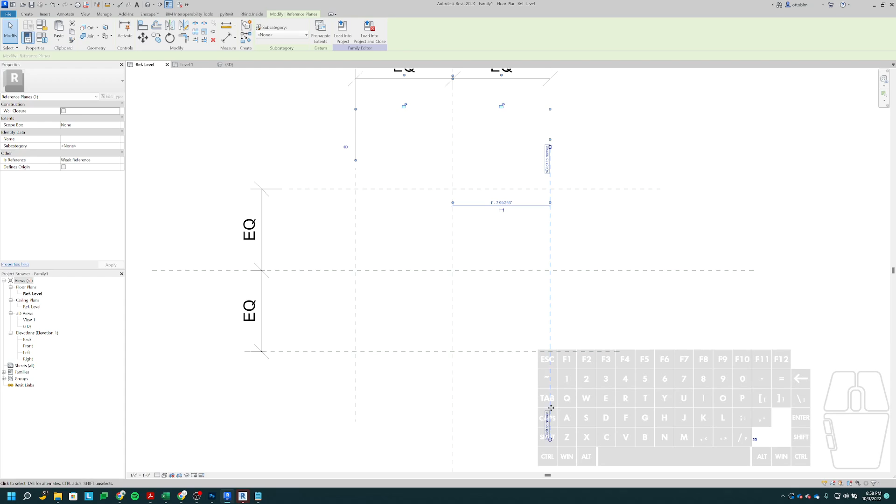This one is going to be back, this one is going to be left, and then this one's going to be right. So we basically have all 4 sides of our box in a plan view. The last dimension though is height, so to draw that in we have to go to an elevation.

So I'm going to go to my front elevation.

And you can see I have two reference planes here on either side, this left and this right. These are three-dimensional, so you're going to see them in the top view and in the front view because they're like three-dimensional actual planes.

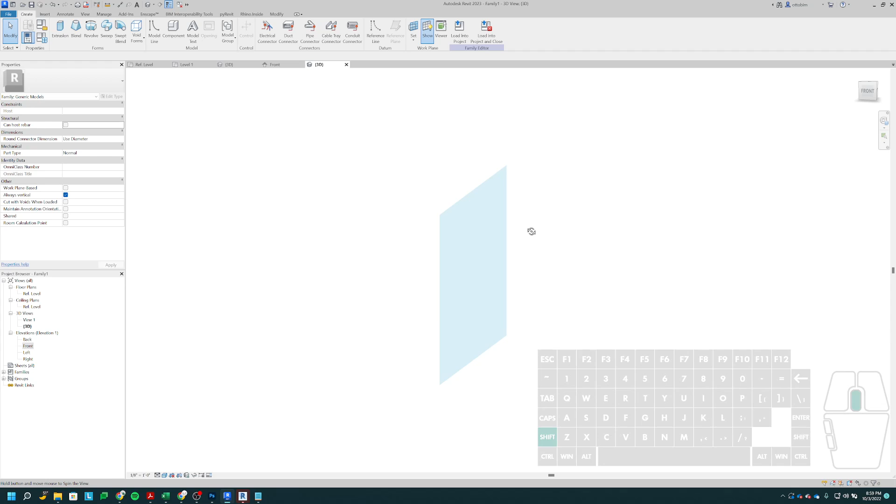If I go to a 3D view just to illustrate really quick, if I were to click here on set plane and then set my plane to be, let's say, the right plane that I drew, I can click on show, and that's going to give you a preview. So this is the reference plane, it's actually a 3D object.

And when we're in floor plan view, we're just seeing this side of it from the top down, so it looks like a line. And when we're in the front elevation view, if I click on my view cube, now I'm in the front and I'm seeing what it looks like vertically. But in reality it's actually a 3D thing, and we're just seeing the thinnest side of it in our 2D views.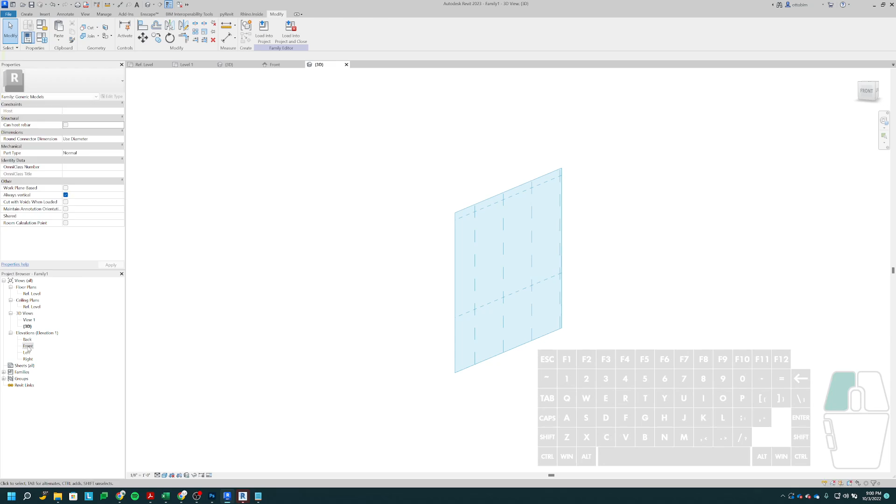All right, so hopefully that makes sense. And if you have any questions, feel free to interrupt if something's not clear.

Now I have to draw in my front reference plane, or my reference plane to control the height of my cube. So going back to create reference plane, from my front view, I want to draw in a reference plane like this.

Now that I've done that, I want to create a dimension to control the height of this. In this case, I don't have to do that equality dimension because I don't have something down here below, and this is the ground plane. So I don't want a reference plane below the ground plane. I just want to start at the ground plane and go upward in height. So I'm going to name this one top.

And then with that selected, you get this preview dimension here. That's really cool because it lets you just click on it and create a dimension out of this. So you can see now I have a dimension that says 2'11".

So if I click on this, this is now where I create my parameter to control the height, like I did with the desk in the project. So to add a parameter to a dimension, you want to select the dimension and then come up here to where it says label and click this tiny little button where it says create parameter.

Right, there's lots of tiny little hidden buttons everywhere in Revit. Just get used to it. It's this button, that's the one that you want.

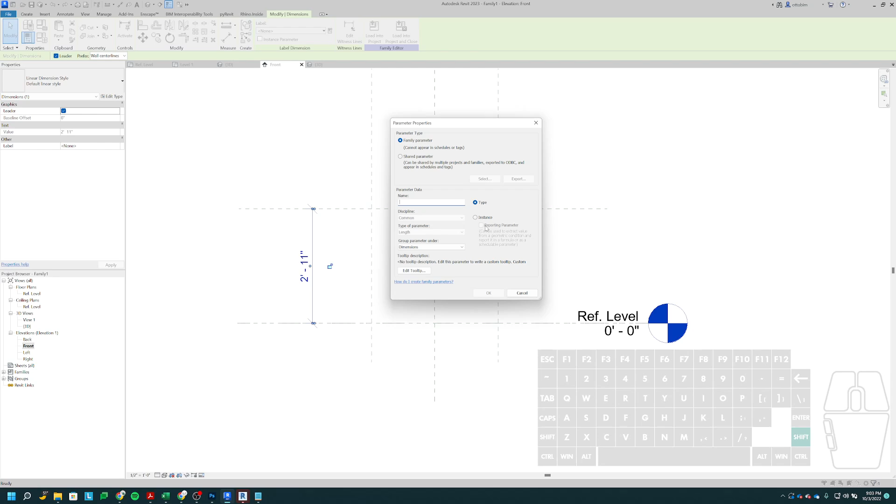So right now I'm just going to leave this as a type parameter, but in the video you'll see what the difference is. So I'm going to call this one height. Click OK. So now it says height equals 2'11".

So if I go back now to my family types window where I have all my parameters, you can see in the list I get under dimensions a control for height. And I can change that to be whatever I want. So maybe I want this to be 4 feet. Click apply, it's going to move it up to 4 feet.

If I want to set back to 2 feet, hit enter, click apply, it's going to move it back down to 2 feet. Okay, so there's my height.

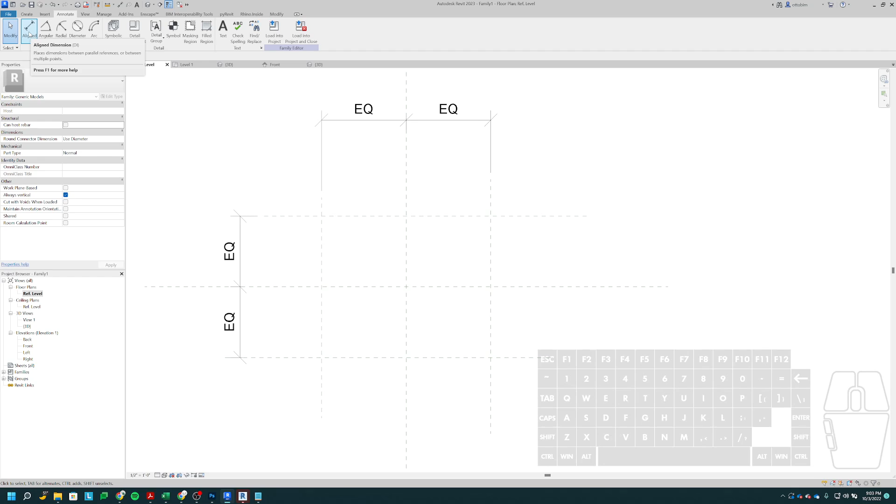For the width and the depth, what I want to do is go here to create, annotate, aligned dimension, and then I want to go here to here for my depth, and then here to here for my width.

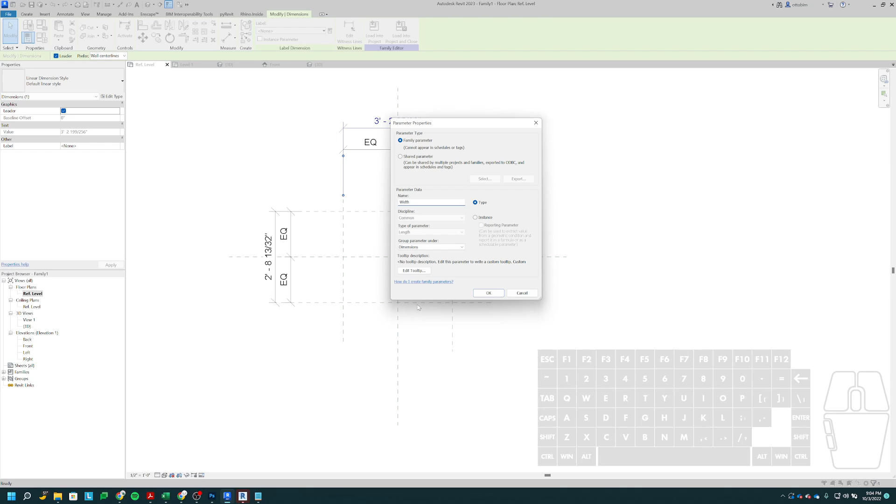So once I've created these, just click on the dimension. Again, new parameter, this one is going to be width. And this one is going to be depth.

And again, I can go back here now. They appear under the list. If you want to, you can change the order of these, but you can go in and change the dimensions. So let's make these even, 3 foot by 3 foot. Okay, so now they're the same.

Another element of this, which hopefully I'll cover more next week during a live session, is this formula section here. Formulas are a way for you to link two parameters together using logic. I don't know if any of you have done coding or programming before, but it's basically the same idea. We're just using logical expressions to make things happen.

For example, this will hopefully illustrate the point I'm making. I could write a formula here that says if depth equals 3 feet, make width 5 feet; if it doesn't equal 3 feet, make it 6 feet. So if depth - and this is case sensitive, you have to spell it correctly for it to understand - there's a very specific syntax you have to use for Revit to understand what you're saying. It's very similar to an Excel or Google Sheets formula. If you've made a spreadsheet and written a formula to do something, it's pretty much the exact same way you have to type it here.

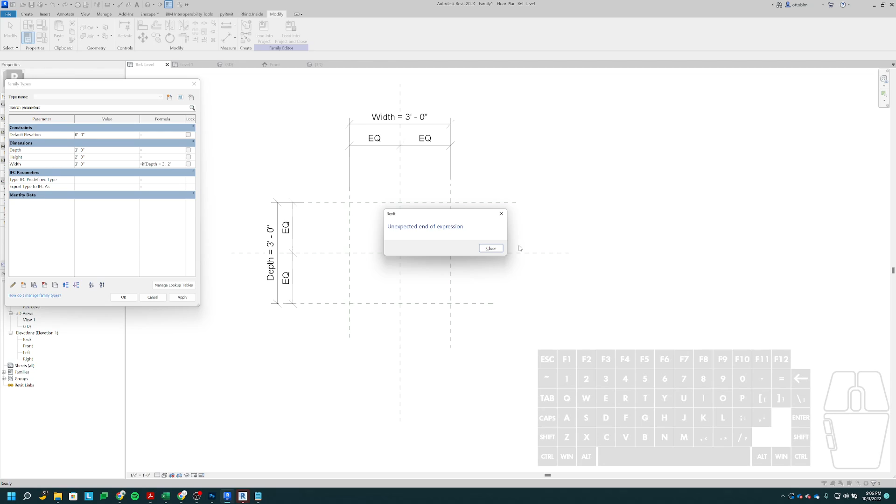So, if depth equals 3 feet, comma, the next thing I'm going to type is what I want width to equal. So I'll type 2 feet. 2 feet, comma, and then the last part is what's going to happen if it doesn't equal 3 feet. So otherwise, if it doesn't equal 3 feet, let's make it 5 feet. And then I have to close this off with a parenthesis.

So now this grays out because the formula is controlling it, and you can see because this is 3 feet, this is set to 2 feet. Now let's change this - I'm going to make depth 4 feet. If I make it 4 feet, you should see this will change the width to 5 feet. There we go, it changes it to 5 feet.

So that's what you would use a formula for - that's a very basic example, and they can get very, very complicated. I'll have to show you some of the other models I make; I write so many of these formulas and they get to be a mile long and so complex. But you can do really cool, powerful things with formulas. If you have a formula in here, it's going to take precedent over what's written in the value and you can't control it. But if you want to get rid of the formula, just highlight it, backspace, and click apply - it clears it out and you get control over the width again.

All right, so we have 8 minutes left. The very last thing to do is show you how to draw the actual cube and tie it to these parameters so that we can change the dimensions of it.

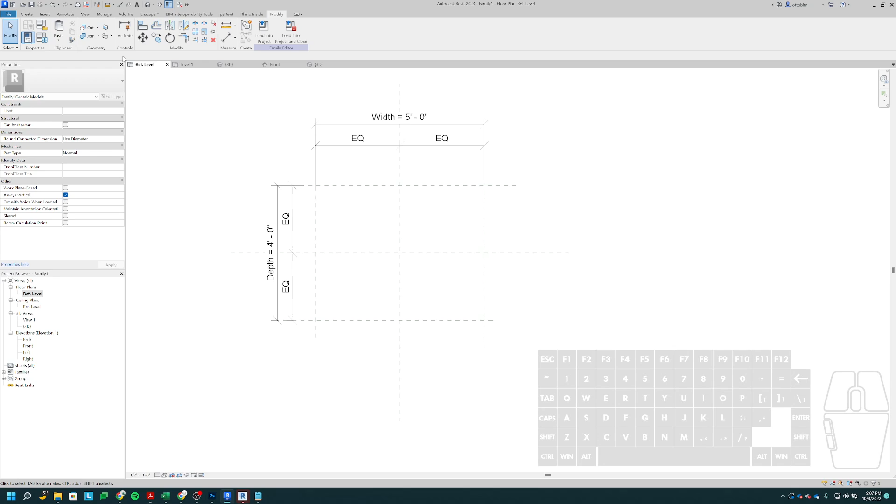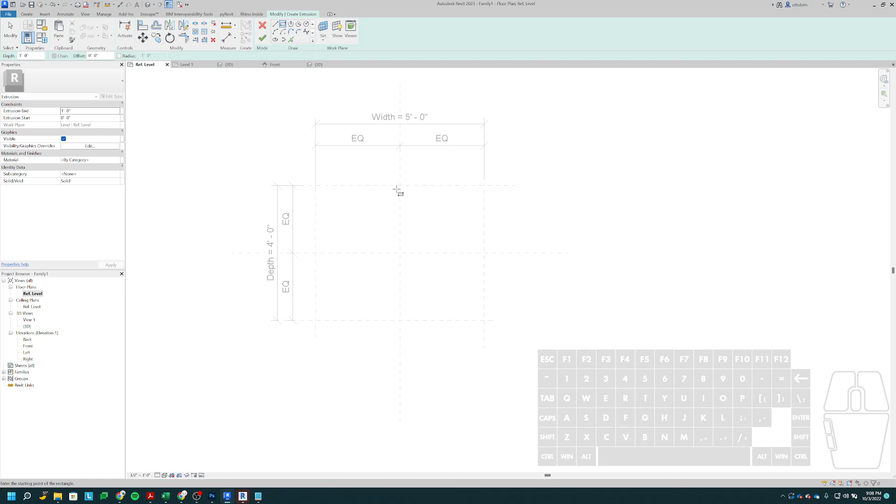I'm going to go back to the Create tab, click on Extrusion, and draw just a basic rectangle. I'm not going to worry too much about the placement - there are a few different ways to do this, I'll show you both. The first way is to draw it directly on top of your reference planes like this. It's just whatever you're comfortable with, so if you want to snap this to reference planes, you can.

Once you do, you get these little lock icons that come up, saying tie this to that reference plane. Think of the pink line as your muscle and the reference plane as the bone - we're going to tie the muscle to the bone so that they move together. So we'll just go around and click on all of these and they're tied.

The other way would be to not worry about where you draw this, just draw it and then use your align tool up here - align, and snap these together. If I click on first what I want to align to, and then second what I want to align, it's going to move it there, make them on top of each other, and then I get the little lock. I usually do it like that out of habit, but if you're more comfortable doing it the other way, you can - it doesn't matter, it does the same thing. So align and lock all of them. Very important.

Okay, and now we click the green check and say that we're done. But we're not done, right?

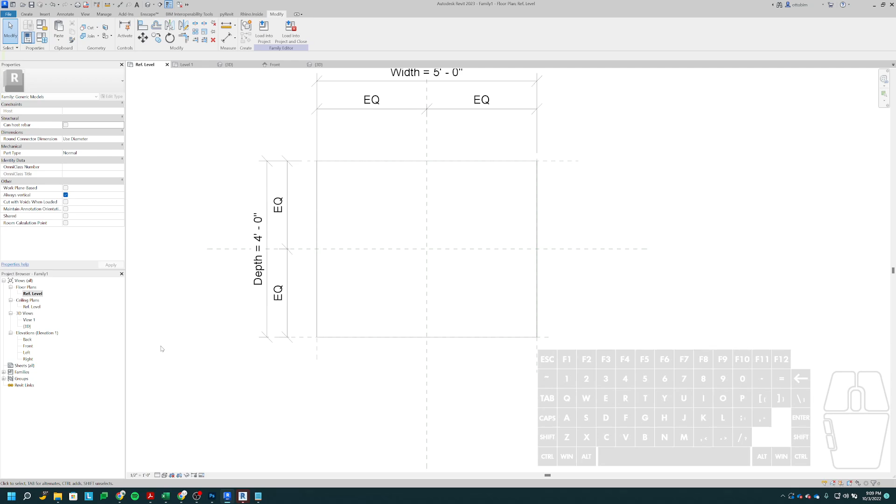Because we have to do the height too. So to do the height, we go to a front elevation, and you can see right now my cube, it's not locked to anything. So I could grab that little handle and drag it and do whatever with it because it's not tied to anything. So now what I can do is drag that over top of that plane, release, and then lock it. Or I could do the align and lock thing, but I think you get it. So now that's locked to it.

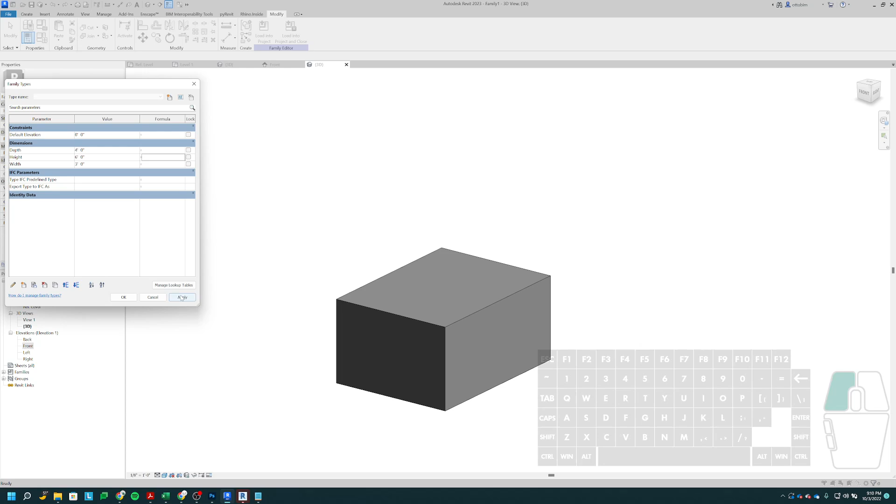And if I go back to 3D view, let me turn off my preview there. Go back to my 3D view. There is my cube. And now if I change my dimensions, it should move however I want it to move. So 3 feet, right? Height, let's make that like 6 feet. Perfect. And then let's make our depth 3 feet.

And that works too. So what I'm doing here is what's called flexing, okay? Flexing is where you draw your parameters, you build all of them, and then you test them to make sure that they do what you expect, right?

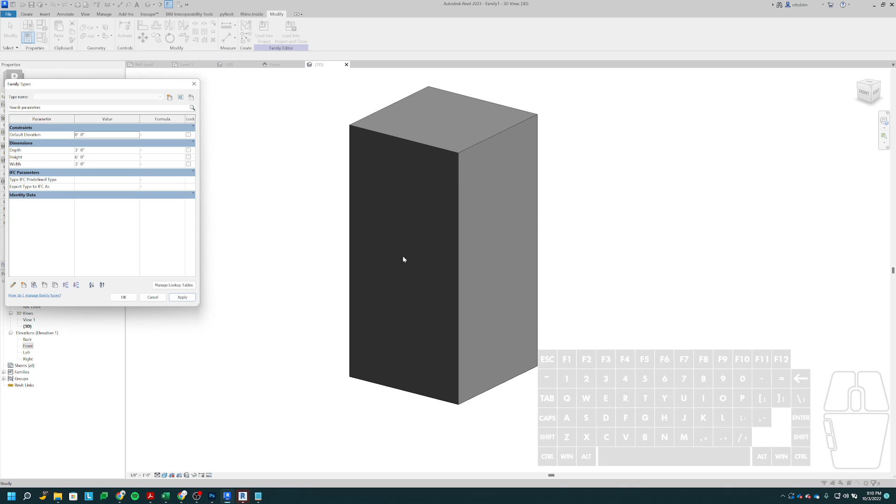So for example, really quickly before we end, if I were to go back in here and unlink this and just put it here, let's say I forgot to align and lock this to that reference plane, right? No more lock icon. I go back here and I go to control my width. And of course it works. Of course it likes to work when I'm trying to illustrate a point.

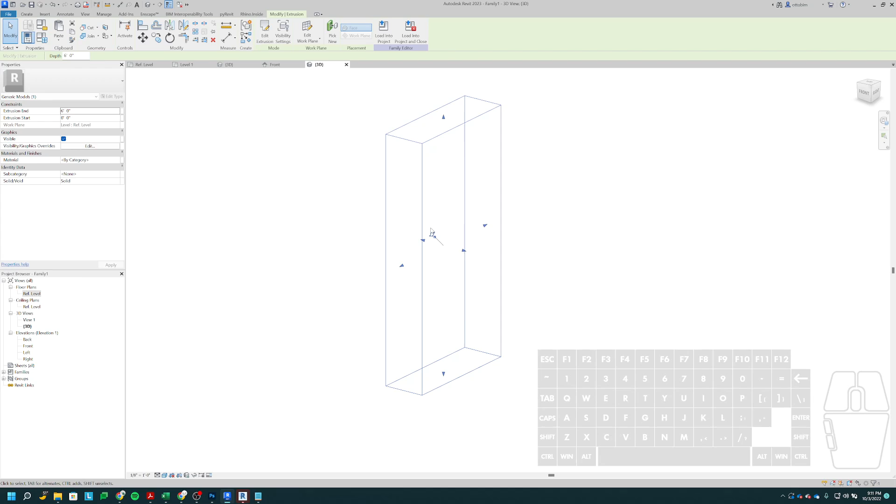Let's say you did that and it didn't work, right? You always have to test things. That's the point. Usually when I do that, it doesn't work right. And you can see there, right? I just changed it, but now it's saying it still says 1 foot here. So I broke the relationship. So if I do 3 foot, maybe it'll... yeah, there. So it's broken. It's obviously not 3 feet, right? So it says 3 feet, but it's like 6 feet. So you always want to check it to make sure that it's doing what you want it to do. And if it's not, you need to go in and fix it.

So the term for that is flexing. I'll always ask you to go in and flex your model. Make sure you test every single one of these parameters you build so that it does what you're expecting it to do. Otherwise, you're going to run into problems in Revit, change something, and it's going to give you a little error at the bottom, and you'll be like, what the heck, why is it doing that? It's because you didn't test out your parameters and make sure they work correctly. So always test as you go. Maybe make 1 or 2 parameters, test it, see that it works, and fix it if it doesn't. All right.